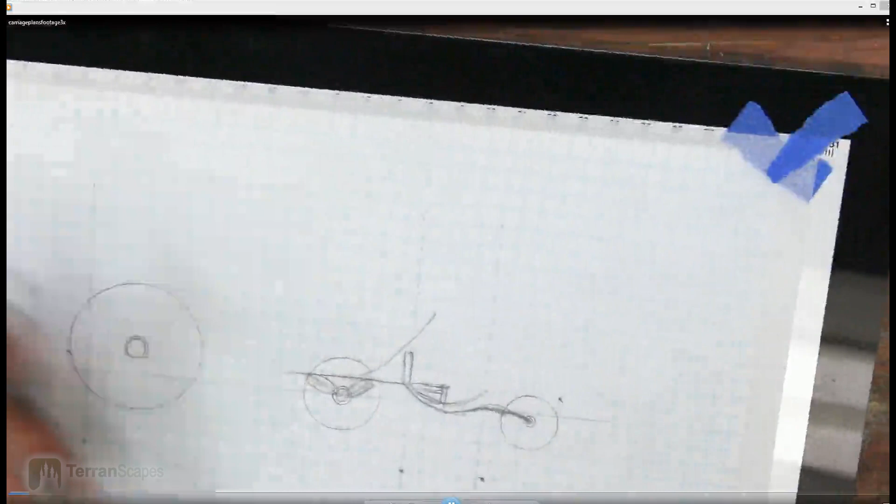I found it really helpful to do that. But at the same time, it did drive my designs to be somewhat similar to the ones that I had seen. So there's a compromise between fostering maximum creativity in terms of raw design and making sure you don't go too far astray while you're working on something. But overall I felt pretty good about the process I went through.

The first thing you're seeing here is that I'm working on some preliminary sketches. One of the things that's a challenge for me is to try to be quick with my early sketches, since I'm likely to make significant revisions along the way. Spending a lot of time getting the initial sketches looking really right ends up being quite a bit of a waste of time.

But one of my personal challenges is that I can't... oh, by the way, this footage is at 3x speed, so just so you know. We've got about three and a half hours of footage here compressed down to one. That allowed me — little tangent here — to show you more of the work at the bench, rather than just recording it with my dialogue, which I can't speed up while I'm actually working.

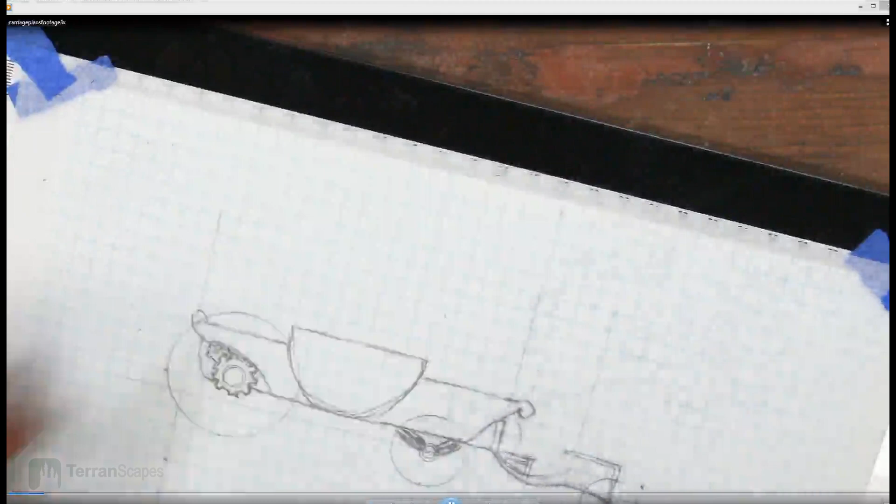So there's another benefit to this format. Where was I? I was talking about my process. For me, it's very hard to see things when they're messy. Chaos does not work for me in general. I have to have a very neat environment when I'm working. If it gets too busy or too crazy, I have to stop and clean things because it starts creating visual and mental distractions for me.

So it's a challenge trying to just do some rough blocking in, and this is pretty good rough blocking in for me. I felt like I stopped rough work maybe a little early, but I just couldn't help it.

One of the things when I was designing the carriage—I'm now calling this the tour carriage, because tour bus just doesn't quite seem right. So this is the tour carriage, and I want to have 3 rows of chairs, benches for passengers, which is probably a mistake because that encourages me to put more miniatures on it, which, yowzers, there's a lot of sculpting work that's going to have to be done there.

But it felt like I wanted to have a central component down below, something I saw on many of the examples, that little enclosed carriage spot in the center of the vehicle. One of the ideas I had early on was to have that wide open, to have it be another bench area underneath that isn't enclosed, and it just doesn't seem quite right. Plus it's going to be really dirty for the passengers, because they're close to the ground and the wheels. So I ended up going with the closed-in look, and I carried that through the rest of the design work.

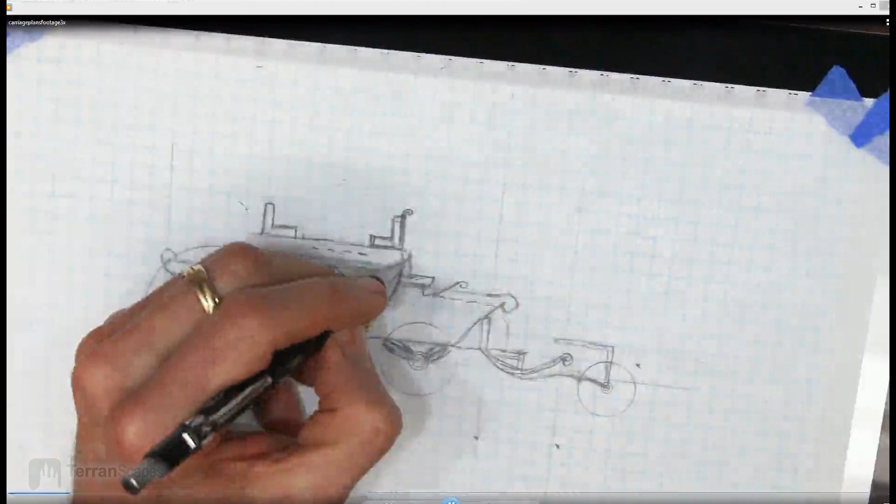You can see me trying to figure out what to do with the seats at this moment. I need to get some miniatures to actually get this down pat, because I discovered while working on this that after all my work measuring the miniatures—how far his knees and thighs, how long do his feet extend out—I kept looking at it and thinking something looks wrong. I put the miniature up against the paper and thought, this doesn't look right. I don't know where I went astray, but I believe the original seating plan I had was too small.

So that actually had the benefit, though, of allowing me to shorten the front of the carriage. The carriage didn't get longer, even though I ended up extending some things. It was interesting to see how the proportions of some areas changed, but not extending it beyond that original length, which I think was about 6.5 inches, my original idea.

So I really need to get some miniatures, sit down with them, break one at the knees and waist, and then make a seat for him. That's actually going to happen before I start real construction on the carriage.

I should have mentioned I said I was going to go right to the 3D mock-up from the last video, and I was thinking I'd just throw something together for the carriage. That made me think, well, I need some rough plans for it, maybe something a little more detailed than the original top-down sketch I had. And I felt like I needed a side view as well so I could do that mock-up.

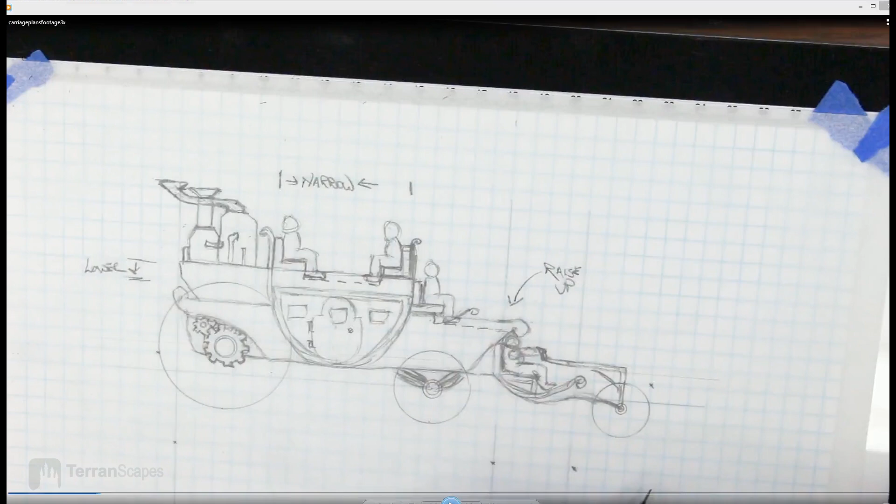Oh, there we go. So you can see here, once I finish, I throw in some notes around the sketch to help me think about areas to focus on for the next version. At this point, I'm pointing out structural changes, balance, and getting things more in proportion block-wise.

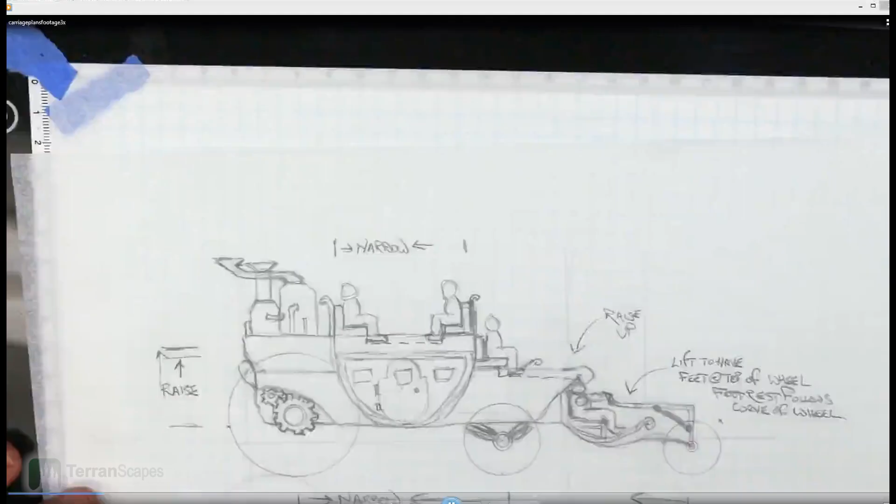One thing I should mention before we leave this is the middle wheel, the front big wheel of the carriage. I thought about putting in leaf springs, since there needs to be some kind of suspension system so it doesn't keep bouncing around when passengers are on it. The rear wheel is more challenging because it's connected to the drive chain, shaft, and gearing. I came up with a solution, which I'll show in the final drawing, but that required some extra thinking.

In one of the sketches I was looking at—sorry, this is off screen, I cut out a lot of footage of me not being centered, it was a little challenging along the way—but I wanted to leave this in so you could see the very beginning of it. We'll talk about the suspension maybe a little later.

Here you see me using what I believe is a French Curves template. I bought this a while ago with all my other drafting stuff and never really used it much. I think I'm using it a bit too early here, since it makes the draft more rigid rather than just throwing sketches on the paper.

But I found it helpful to create nice regular curves. Still, I found it challenging to make things symmetrical using it, because when I flip it over, I have to make sure I've lined it up pretty much the exact same way, and that can be tricky since the French curve template doesn't have any markings on it.

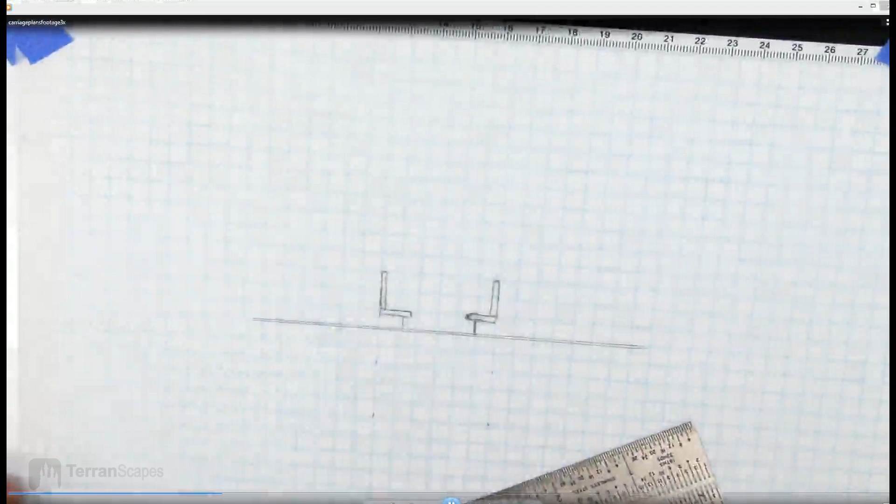You can see up in the corners, I just throw some blue tape on the corners of the paper and tape it down, so I can continuously throw tracing paper right over the graph paper, and it's nice and clean and easy to erase. When I take it off the graph paper, it visually comes through a lot cleaner as well. I really enjoyed this little setup, and I use it for all the sort of drafting and sketching work that I do.

Now I'm working on the 3rd version, and we're 20 minutes into this video, and I'll spend almost the remainder of the time on this version. It's a little bit early maybe to go to the final version, but I just felt like I had enough of a conception to stick with one idea from here on, although I make some moderate changes along the way.

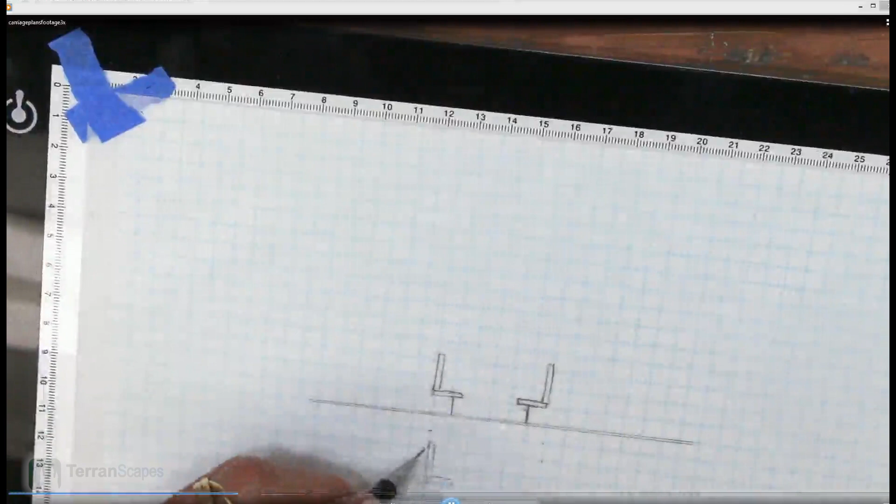It's how it works. I find design work like this very enjoyable, but at the same time, it feels a little pressing to get it done so that I can start building.

This is a new experience for me, in that I feel pressed to get to the construction for you guys. I think at some point you're probably going to be done watching me draw things and you'd like to see me actually build something. Whereas in the past, I've felt that way for my client, thinking I need to get past this stage to get building for them. So still, I'm in the same position, and I think even if I didn't have anybody looking over my shoulder, I would feel the same way.

Doing this drafting work here, I'm showing you 3 hours of work, but I probably spent, I don't know, that's probably a little high, but I spent a long time doing these drafts, and I feel like it's really important though. Imagine going through the process of building and then trying to make these kinds of revisions along the way - that's just insane. So it's important. I enjoy it, but it takes a while, and that can feel a little frustrating for me because I'm not very quick at it. So, pros and cons, challenges, rewards - part of the life of what it is that I do.

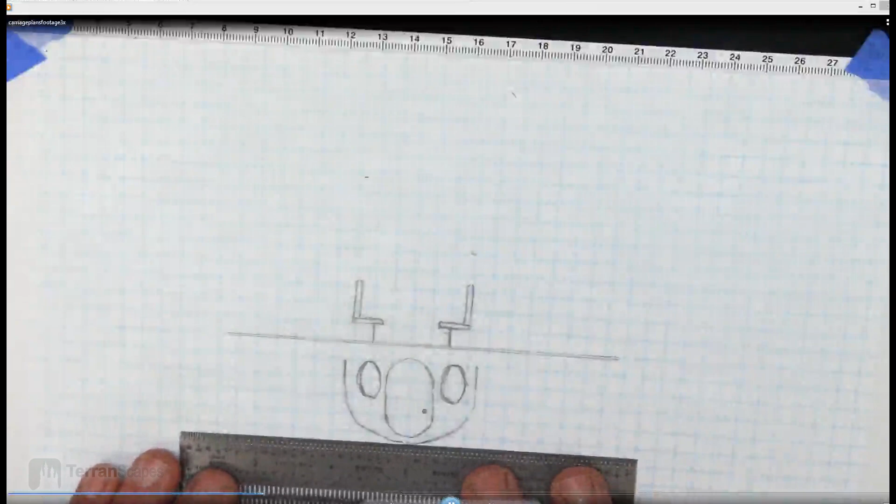What I started working towards, which you see here, and I changed quite a bit later on, is I was kind of going for a bit of a diving bell look. I was thinking, because I'm next to the harbor, that it might help me convey a sense of a connection to the water, and that really was a mistake.

Well, I don't want to call it a mistake - it was just not a direction that I ended up going in. So you see here where I'm trying to match up the sides, and I'm like, wait a minute, where was that? How does that match? Why is that not right? I couldn't quite get it - I get it, but it takes me a few instances.

That's what I was talking about with the French curves template, that it's not always easiest to get good symmetry. Another aspect of this part of the design is that I had originally intended the bottom of the carriage chamber to have more of a point at the bottom. But when I was looking at references, and thinking about it myself, having a flat bottom shortens it a little bit and allows more foot space for the passengers, so it just made more sense to have that flat bottom.

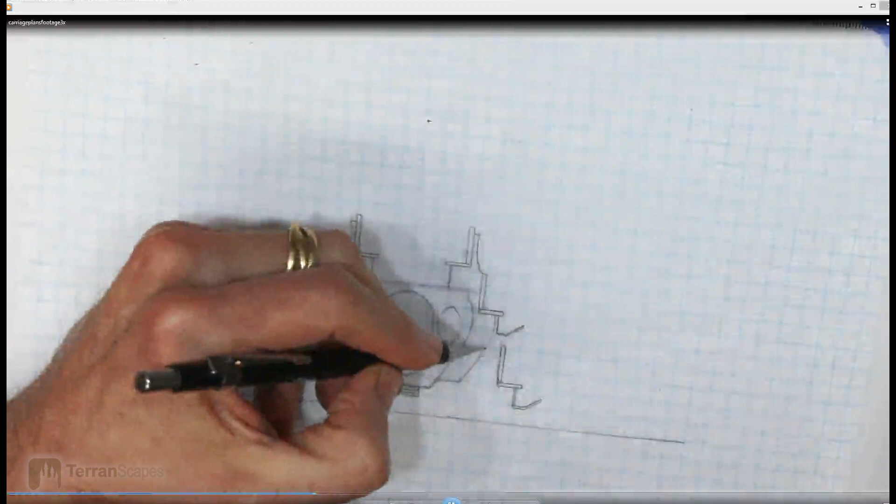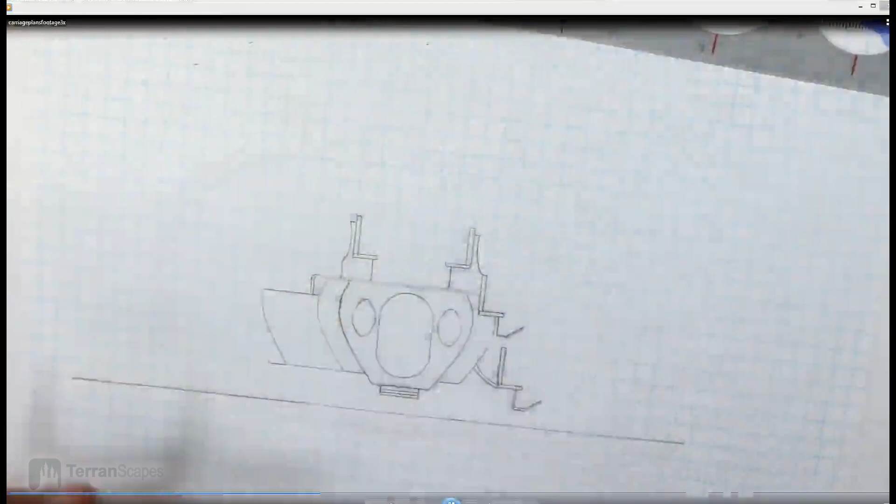So we've jumped ahead a little bit here. The front of the carriage where the driver sits, and that front wheel, became its own area of focus and challenge. Where I started with the driver, I liked a lot—I had him pretty low, so he's riding just above the ground, right in front of the main front wheel of the carriage, and it seemed like a great place for him. But you'll see later that I had to move him a bit to work with the seating right above him, which was planned for passengers.

One of the things I also had to consider is that the head of a passenger or the driver sits above the back of the chair, so I've got to leave some space above the chair to accommodate that and not make it feel cramped for the passengers or the driver. It's an interesting conundrum that I modify as I go along.

Now, when I'm placing the wheels, one of the major considerations I've been working through is where the axle is going to go. If I want big wheels—and I want pretty big wheels—I'm forced to push the wheels out away from the main body, otherwise they'd overlap the door to the carriage underneath. That meant I had to think about how they were going to attach, and the rear wheel is an extreme example of that because of its much larger size.

So what I decided to do—and I felt a little proud about this solution—is put the front wheel on a pivoting lever, so I can have a shock absorber above it that lets it flex up and down on that pivoting axle. That gives me a suspension system, and putting a shock absorber above it is going to be much easier than trying to model leaf springs. I haven't seen anything like that in any of my references, so I thought, that's kind of nice—something a little original that I think will work out really well.

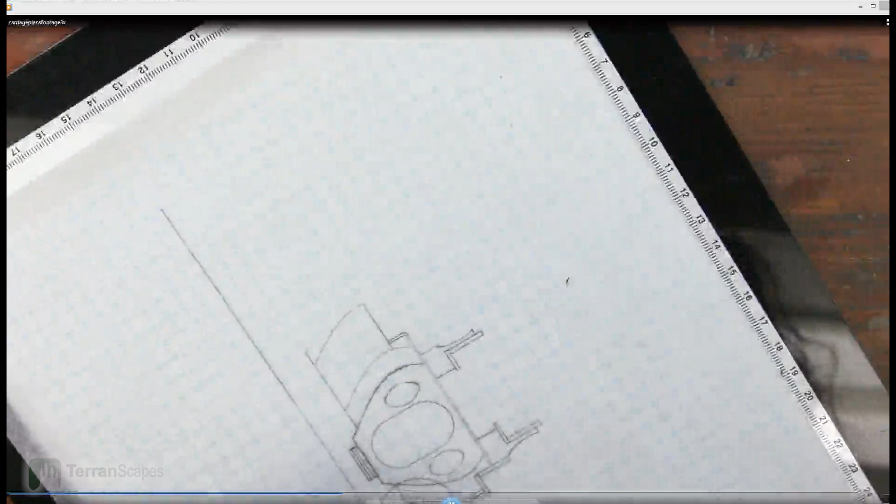There's the pivot joint, but that's probably going to have to change a little once I get the final model underway and get a better sense of how the axles are going to meet the body of the carriage. I plan on doing a new top-down view so I can incorporate these new design elements to make that more accurate.

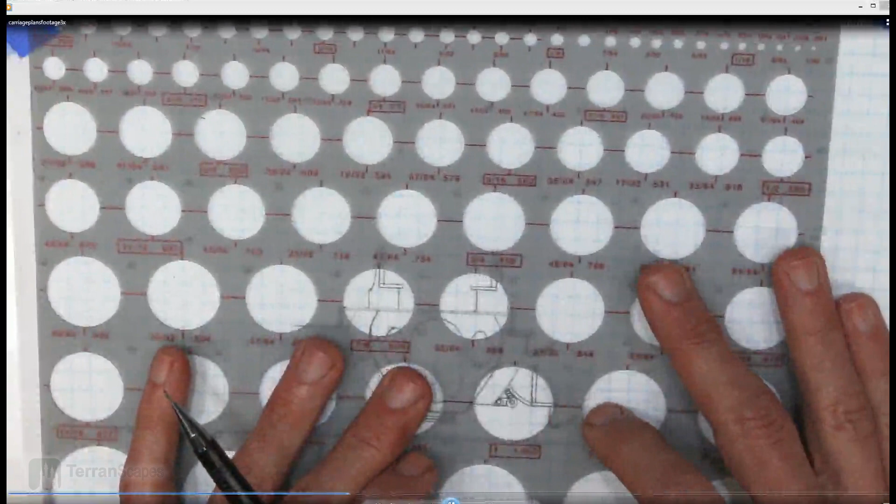But I'm not going to be doing a front or rear view since I can, for the most part, see those visually pretty easily. But I feel like I need the top-down view to get a sense of the width of the vehicle, and I'm going to make a very simple 3D mock-up of the carriage to plan out the scene. I really need that top-down view combined with the side view.

I wish I had taken some classes on drafting. I think that would have helped so much. You know, when I was in college, just take a drafting class, because one of my really big deficits is not being able to do a perspective drawing.

And I actually bought some perspective drawing books, and I was practicing for a while, and I spent quite a bit of time on it. I think based on that experience, if I took some time, I could get a perspective drawing done, but it would take me a while, too long, and I'm slow enough as it is. But boy, that would really make viewing anything that I draw so much easier.

There are bound to be people who are going to suggest, and have done so many times, that I should do this kind of design work in SketchUp or something like that, where on the computer I can rotate it in any direction. I've said this before, I'll say it again.

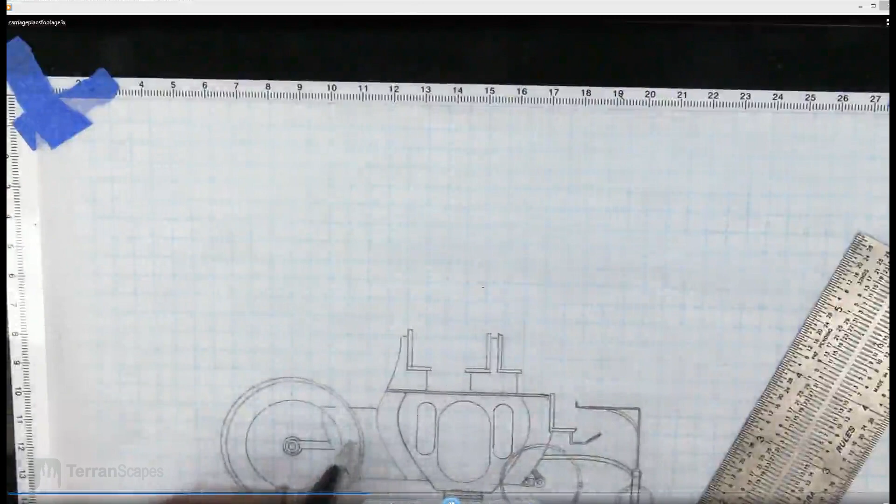Oh, this is my protractor, and I really hate working with it. I hate working with it. But I don't have another protractor, so I'm just getting by with it, and it's what I've got. I use it so infrequently I've been reluctant to purchase another one, although I could probably get a plastic protractor for $2 on Amazon. Maybe I should just go and buy one and put it in the drafting box.

Where was I? Computer drafting. I played around in SketchUp for probably about 4 or 5 hours, and I was learning, but it was very time consuming for me to get a handle on how to fluently rotate things and create shapes and attach them. Something like this, where there's a lot of curves, it would take me forever to draw in SketchUp until I got fluent in it.

And I have so much software I want to be fluent in that I just haven't been willing to devote the time to it. Quite frankly, I'm a little old-fashioned. I love paper and pencil. I love the erasing and sitting at the bench, and there's a real pleasure to that. If I was annoyed by drawing with paper and pencil, if I hated this process, I probably would have moved to the computer already, but because I enjoy it, that's where I'm at.

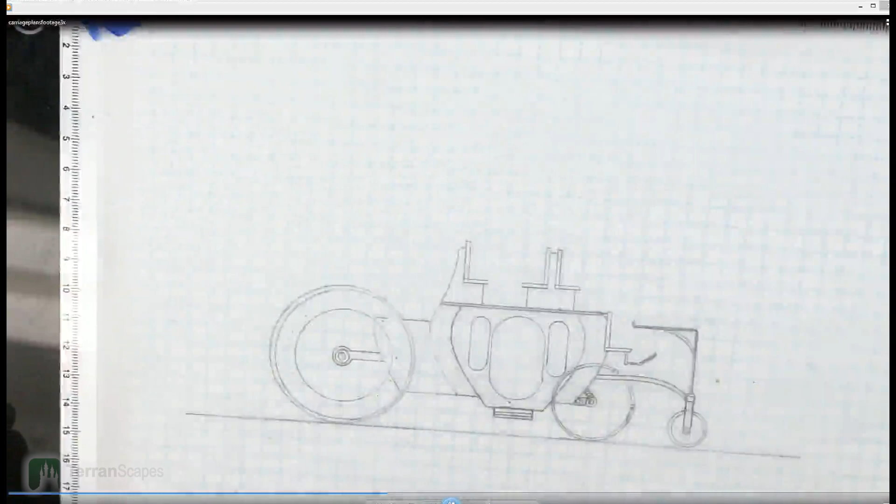In the long run I'm probably slowing myself down, because once I got fluent, that would be a bonus to be doing it on the computer. But I don't think it's ever going to happen. I would love to be fluent in a couple different programs that I haven't even studied.

We have to choose where we're going to expend our time. I guarantee you, if you're watching the video and you've listened this far, look in the comments—somebody hasn't listened to this part, and they're going to tell me, why didn't you do it in Google SketchUp?

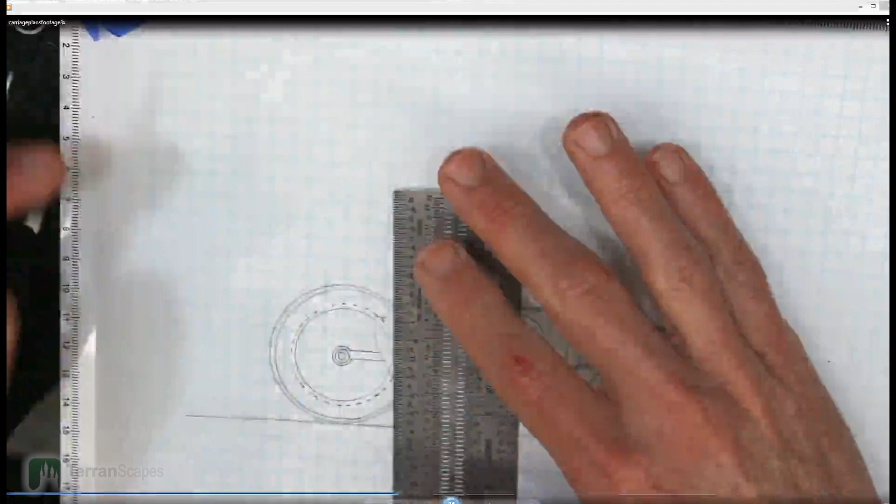Back to the drafting work I'm doing here. I'm working on the rear wheel, and at this moment I'm trying to envision the spokes and the gears. This is actually the gear for the rear wheel, which I'm envisioning being quite large.

Here you see me, I'm like, okay, I'm going to use the ruler for this. And then you'll see me, okay, screw the ruler, I'm just going to draw them in. There are limits to my neuroticism.

But you'll notice the axle of the wheel—it occurred to me that I can do something similar to the front wheel and extend it backwards. I'm going to show you some watch hands at the end of the video. I won't explain it any more than that, but I can use them perhaps to make the axle holder, and I think that gives me a lot of flexibility in how I want to work with the rear wheel. I need some of that space to accommodate the gearing, because if I have a large gear in the back wheel, I need space in front of it for the smaller gears that drive it.

So you can see, when I start putting in those gears here, I start to quickly fill up that space. And if I want to have other elements there, like little metal plates or a pipe, that little section of canvas starts to fill up pretty quick. But I'm having some difficulty.

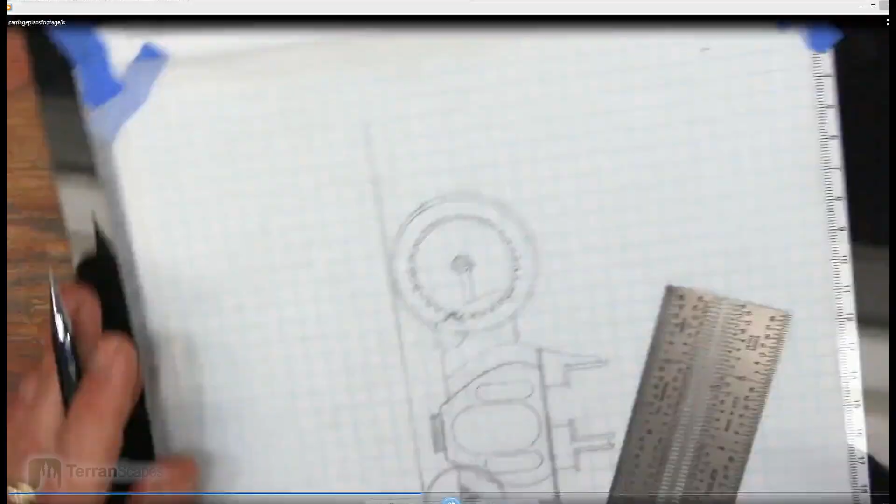One of the things I realized a little bit later on when working on this, I think by the end of the second draft, is that I want this vehicle to feel airy. When I look at some steampunk, it varies quite a bit. The genre has some definite themes that run through it in terms of visual design, but there can be quite a bit of variety as well. I wanted this to feel lightweight.

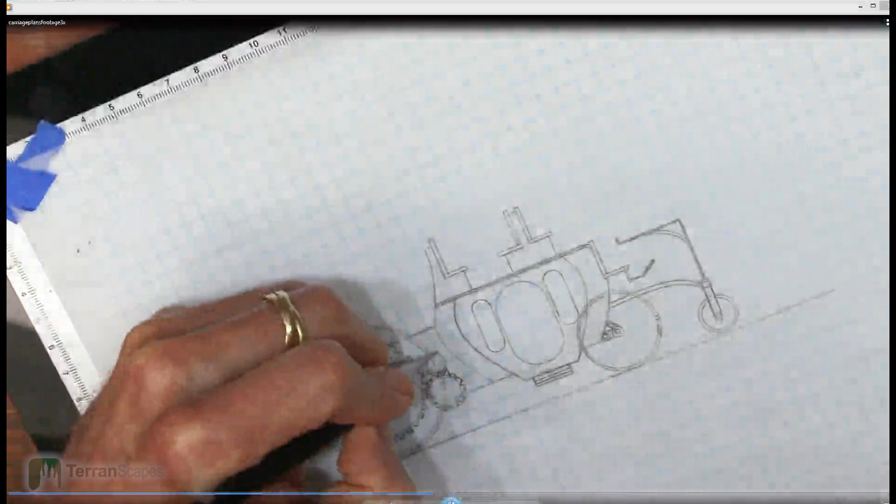A lot of times in steampunk universes, the underlying story background is that they have discovered some kind of super metal or super power source that allows them to design things that normally would exceed our normal physics. So one of the focuses was thinking about how to make it feel airy.

And if you look at the rear wheel, the sprocket that I put in is a fairly heavy, bulky sprocket, and that is not what I want. But I ended up just putting that one in as a placeholder because I'll end up trying to find a gear for it later that feels a little bit emptier, that has more negative space in it. So when I've been looking at other elements of the vehicle, that's something I've been keeping in mind and trying to envision.

Of course, the area in the back with the machinery, that's obviously going to be heavy feeling and should, but these are just some... oh, for God's sakes, skip that.

Working with the back of the vehicle and the power plant, it's amazing how each section of the vehicle has its own challenges and design, very different design feels, very different design elements. So, in the back, it's how do I give it a busy feel, I guess is the word I'm looking for.

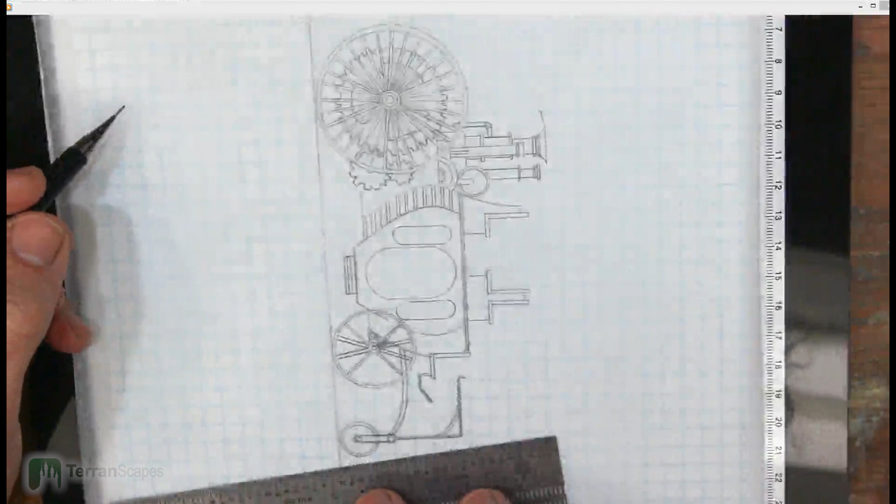So I was pretty excited about that solution, and I don't know if I'll really be able to show it in the top-down view, but that is something you will see in the final vehicle. I think it just provides the best solution to that problem.

But it was just really interesting looking at the different references and how that's never shown. It's kind of like when you're looking at motorcycle videos and photos, you always see the side with the tailpipes, but what's the other side look like? So sort of similar to that.

And here you can see me cleaning up those in-between areas with the very point of that eraser. That's one of the things that, like I said before, I really like about that eraser.

Even things like the spoke work on the wheels has its own sort of interesting design element, in that how many am I going to put in? The back wheel has too many, and you'll see me mark that later on. That's way too many. But that brings me to the topic of, how the hell am I going to build this?

Yeah, I have no idea how I am going to construct some of these elements.

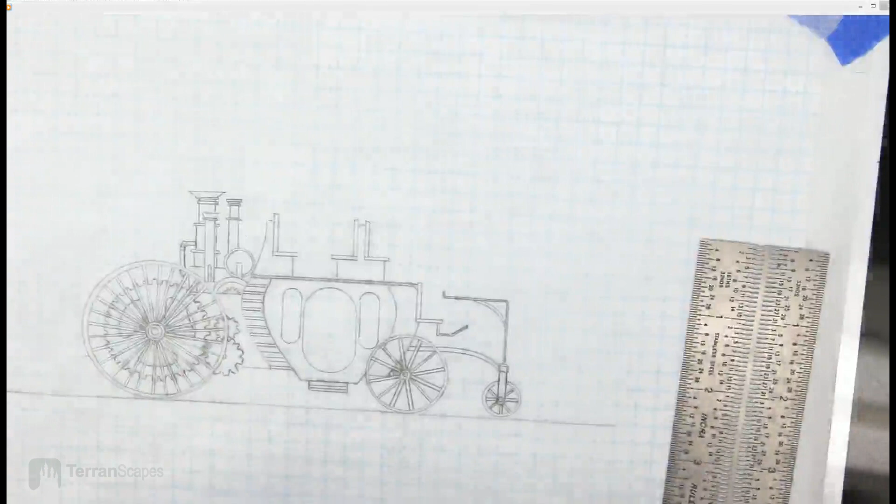Building the wheels is an interesting challenge, because if the spokes aren't perfectly matched or extremely close, and I make the wheel rim out of, say, a strip of styrene, when I put the spokes in they'll deform the wheel—either they'll push out a section or they won't meet the rim and cause problems. So I think I have a tool that will allow me to cut those pretty precisely.

But then I have to glue them in, and they have to be within the middle of the rim, right? So I'm going to have to make a jig to create some of these pieces, to space things properly and get their heights and such lined up right.

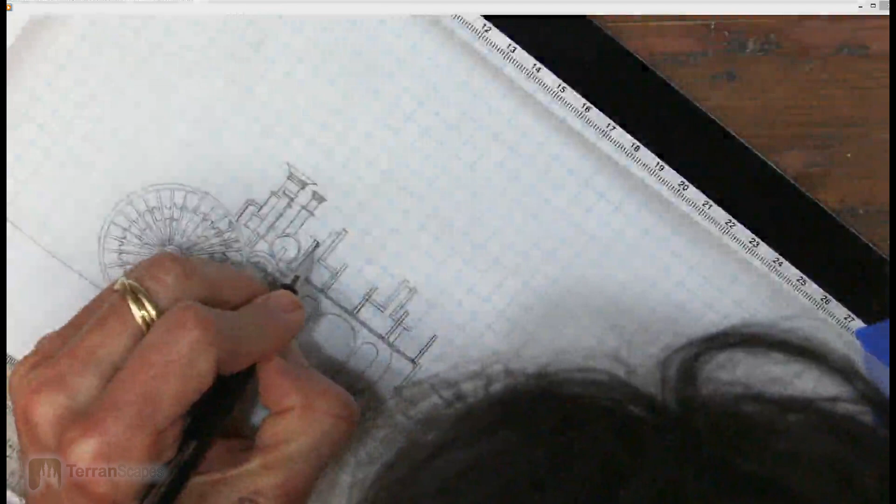I came up with the idea for cutting some of these pieces out by scanning this drawing, then I can make copies of it, and glue them down with a very light amount of spray adhesive that'll just peel off after I'm done. Then I can run styrene sheets through my scroll saw, using this as a template for directly cutting out the pieces that I want.

Cutting this kind of curving design with an X-Acto blade or whatever is a nightmare—that's never going to happen, it's never going to look good. So the scroll saw was like a big idea for me that I was really excited about.

And here I'm doing a little bit of a railing around the top, and I've seen some examples of that as well. That's been another, like, oh God, how am I going to do that? What I've drawn in here is much more basic than what I envision—this is definitely a placeholder—and how to create those fine posts and maybe add a little bit of a design.

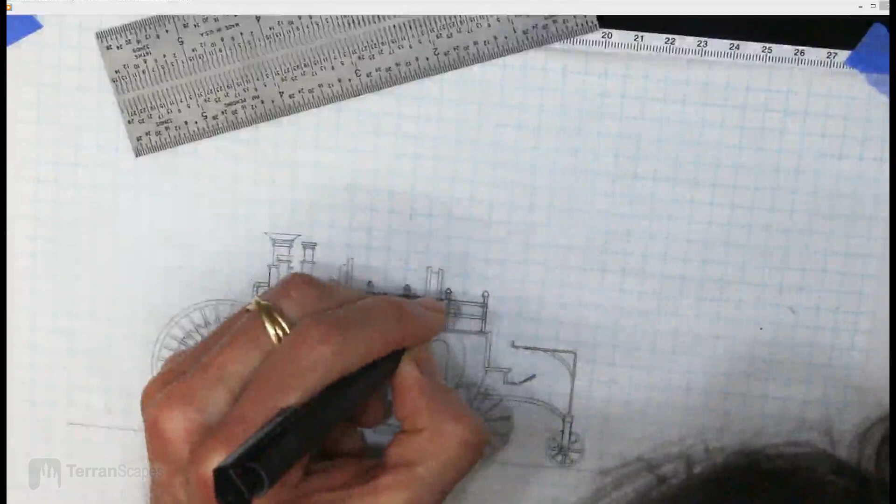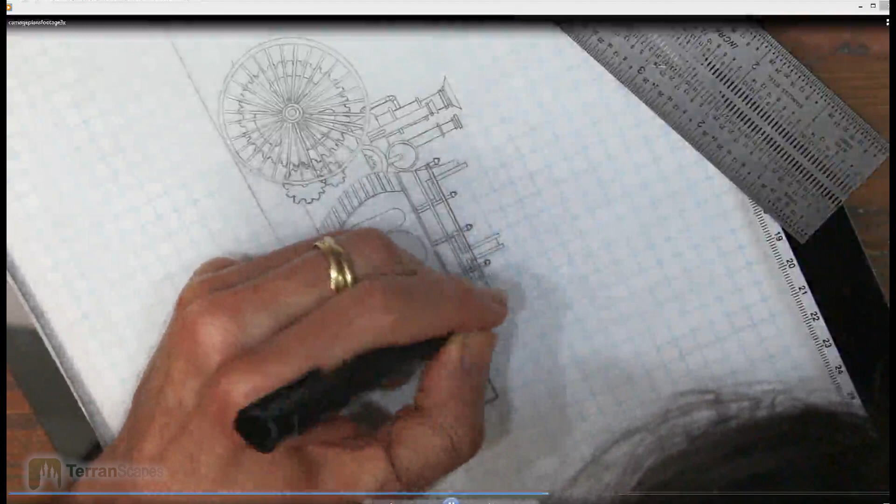After my attempt at doing design work on the elf buildings to have them laser cut, it left a little bit of a bad taste in my mouth. I won't go into it more than that, but I've decided that I would not pursue anything like that for this project, and that everything would be hand constructed.

That leads me to some problems where I have to figure out how I'm going to actually put things together. But it also allows me to create some elements that wouldn't easily be done with a laser cutter. And for things that are round, I have to do that with round styrene tube or something like that.

To build a little suspense, I came up with, I think, an excellent solution for the railing.

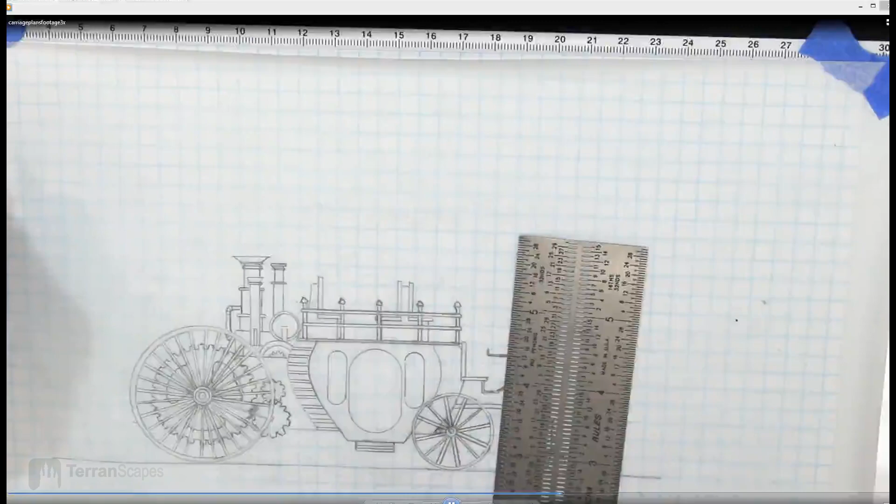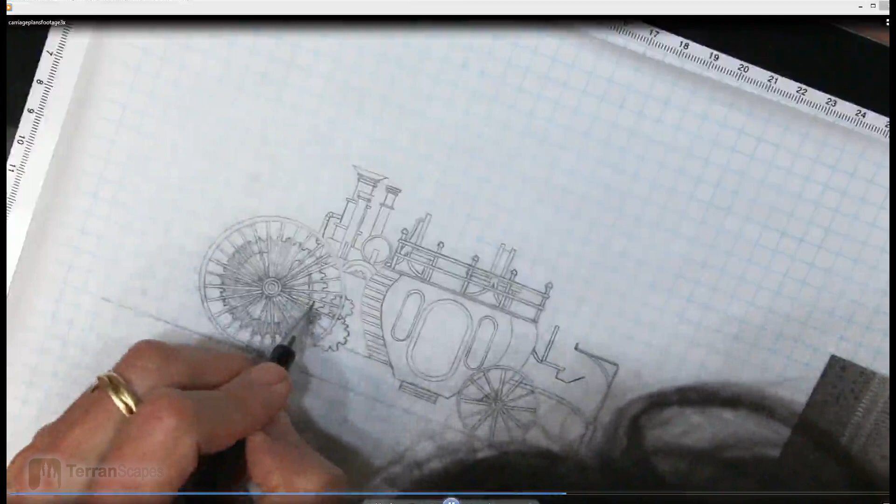One of the things that's interesting about the way I work - I don't know if this works for anybody else - is because each of my steps takes so long, it gives me a chance to think about things longer. As I'm going along, I do four hours, go away, come back the next day, and all of a sudden I've gotten an idea. If I had whipped out all of these drafts in one day and started construction, I would be pretty lost about how to do some things, and probably would start one way and then change my mind and have to take them apart later. So there's an advantage, I guess, to going slow and taking your time, at least for me.

So like I said, it's a bit of a mixed bag, my pacing on projects and different aspects of them, but it is one of the advantages that I'm always grateful for, pleased with. I don't know how to explain it exactly.

Here I start shading in some elements, to help me visually discriminate between them and give maybe a little bit of a sense of depth between the layers. Those gears, again, are very blocky. I'll be using much lighter, more delicate-looking gears in the final version.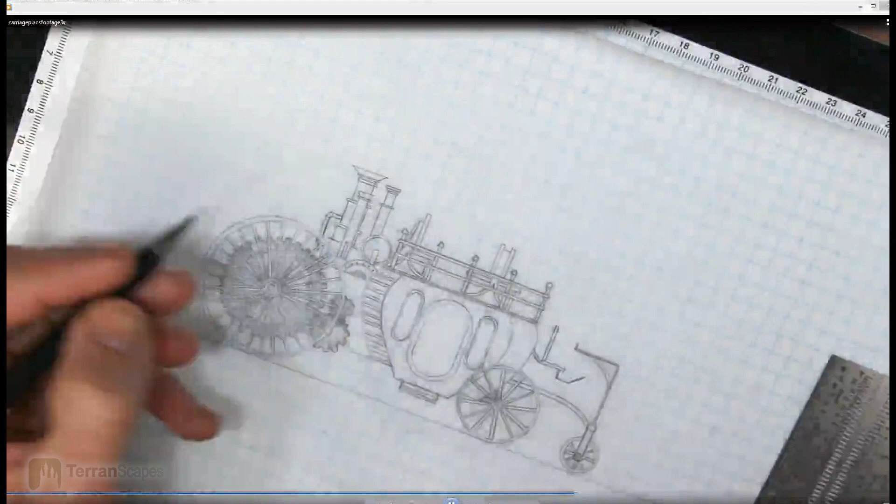Another element I was pondering as I worked on this were rivets. Rivets, rivets, rivets - how many should I have? A lot? Hardly any? Should I just have them on the steamwork behind and none on the front? I don't know, I'm still not 100% sure how far I'll go with that.

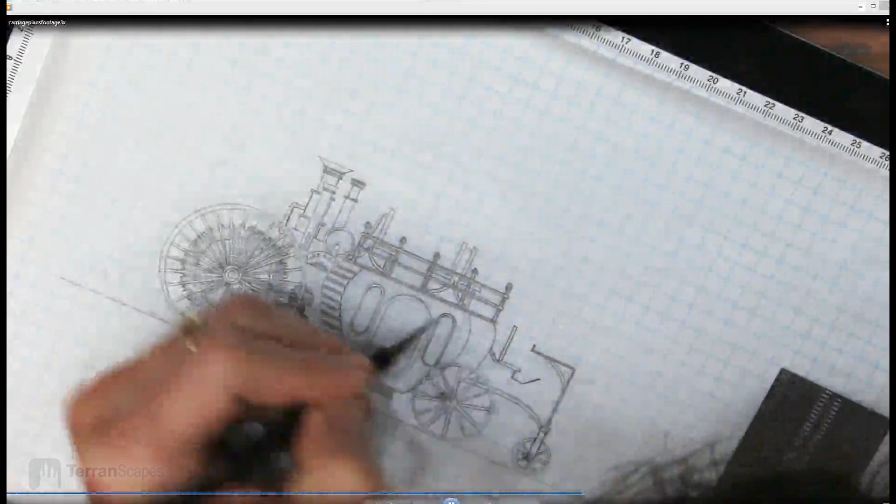A little bit later you'll see me maybe put some rivets around the door to get a sense of what that might look like. Here I'm still with that sort of diving bell look, and I'm going to change this in a bit. When I put the rivets around the door, I didn't like it - I don't want the carriage to feel heavy overall, and rivets certainly imply a weight to that.

Of course, I have a lot of rivet-making material that I've hardly ever used, so the excuse to use them on a project like this is tempting. I will be putting in a handful - too many, probably - rivets in the steamwork section of the vehicle, certainly.

But how to tie that into certain areas, I don't know. I think I'm going to keep them relegated to the back of the vehicle and have the front be basically wood construction in essence. I'm not going to be putting in planking for the construction of the carriage body - it's not like that kind of wood, but a wood feel rather than a metal plating feel is definitely where I'm going.

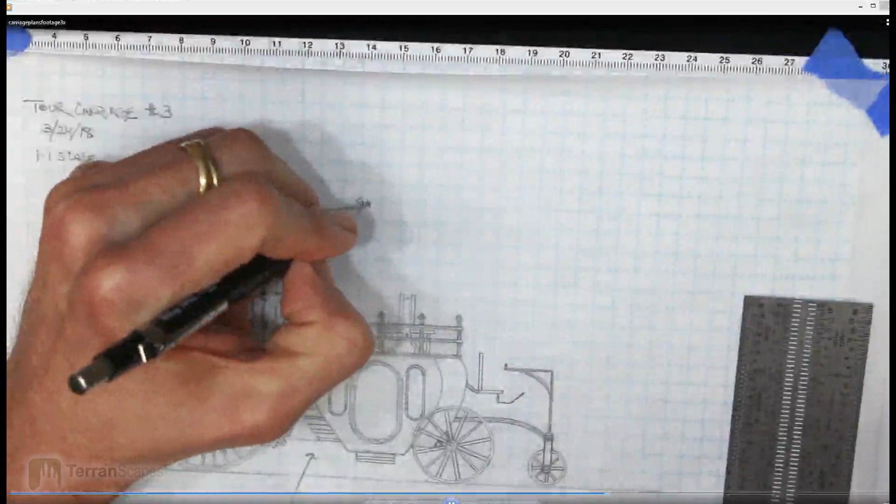Here you see me putting in some of those notes that I add to all of my drafts. Even though these are things I'm thinking about, sometimes for multiple days on end or even longer, I still write them down in case I come away from this draft for a while, so when I come back to it, it jogs my memory. It also gives me another way of thinking and problem solving, because sometimes as I'm writing down my thoughts on paper, it jogs me to think about a solution. So throwing in notes on the draft is always something kind of important to me.

So I'm trying to think about where the door handle should go. To me, the door handle should be reachable by the driver, since he needs to let people out, but it can't be at the very bottom in case the passengers want to use it themselves. That's why I used the miniature a couple minutes back, to throw it up against the door and see where exactly this is going to go.

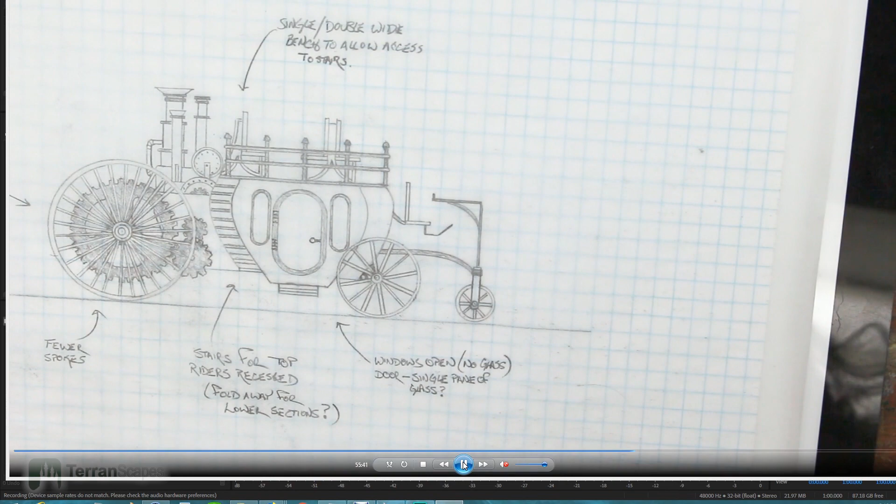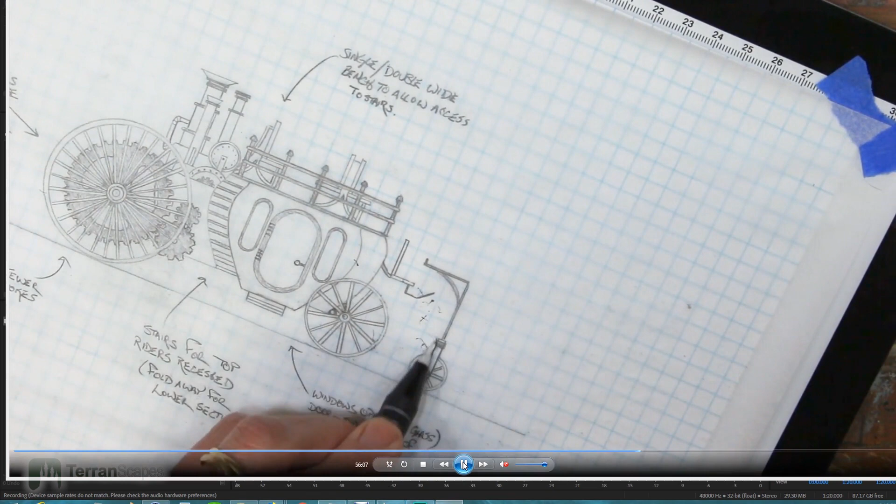So after pausing for a second, I realized that the recording quality was crappy. So I've made some changes, and I may need to change my software as well, but I think this setting will produce a better result. Not happy about that, but we'll work on that. I'm not going to re-record the first part because it was an hour of me chatting, and I try to keep it feeling kind of fresh and natural. So let us continue.

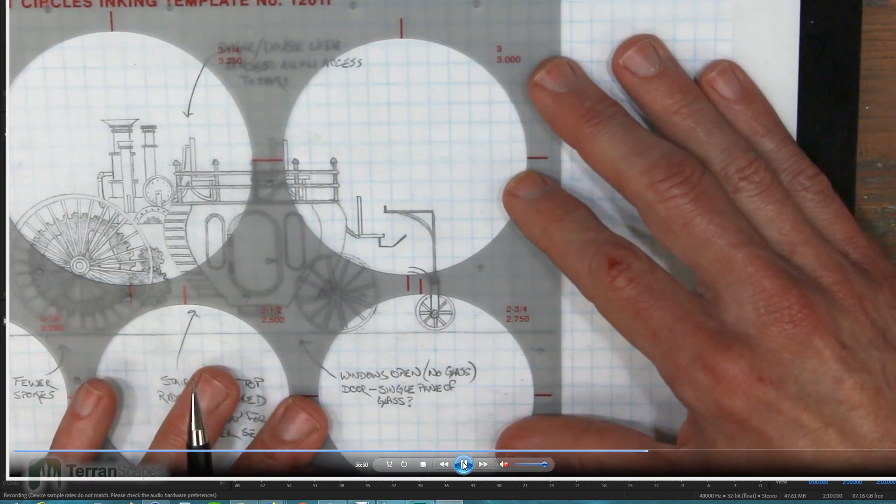If you noticed, I just made some notes about the windows of the carriage being glass or not glass. I had originally thought when I made that drawing that I might make the door a single pane of glass, thinking if this is a touring vehicle, you could see more if there was more of it that was open. I eventually changed the windows and door design, and I decided to keep them open. Most of the time, maybe all the time, I'm seeing all my examples being open windowed, and it simplifies things for me a little bit.

Here I wanted to have, you can see me trying to figure it out, a sweeping arc to the rod that's holding the front wheel or wheels. I haven't decided if it's a double wheel just yet. Despite my best efforts looking at the templates, my circles, I just could not figure out a curve that would work, so I hand drew this one in. It actually came out okay, but to get a nice smooth line, it required a lot of trying to clean it up. It annoyed me a little bit, but in the end I get a sense of what I was originally intending, at least. And again, I don't know how I'm going to make this.

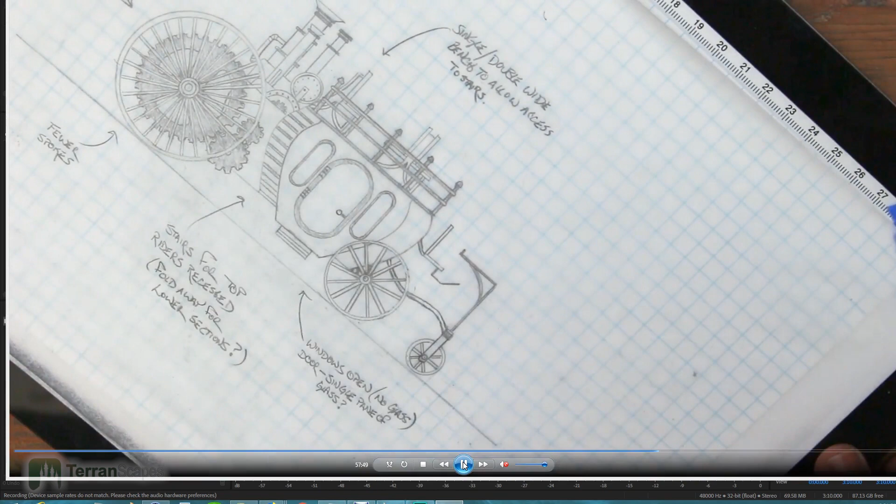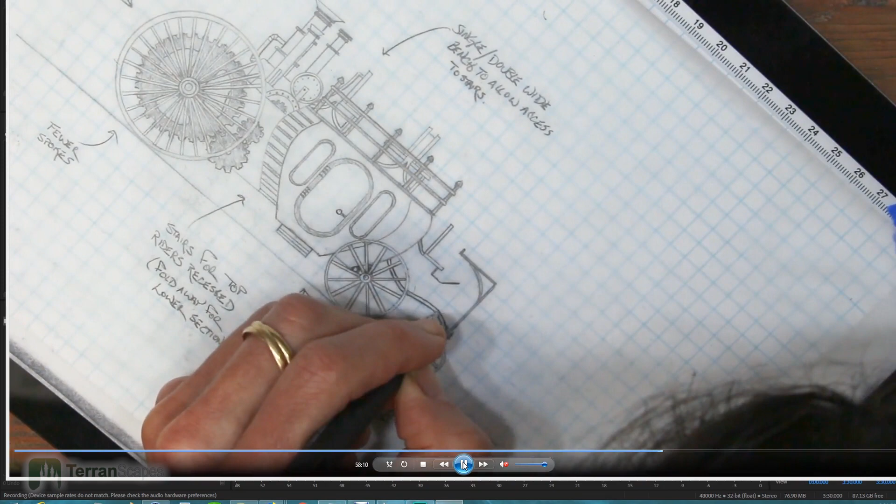Maybe I can heat styrene rod until it's soft enough that I can bend it, or I could do that with flat pieces. Anyway, I don't know, we'll see when I get there, but these are the kinds of things that I'm thinking about as I'm working on it. And I've decided that I was going to design it irrespective of how to construct it. I wanted to let my design not be impeded by the construction. Of course, along the way I've been a little worried at certain parts, but I can usually problem solve things somehow or another. I'll figure it out, and whatever I have to learn will only add to my skills, my toolbox, if you will.

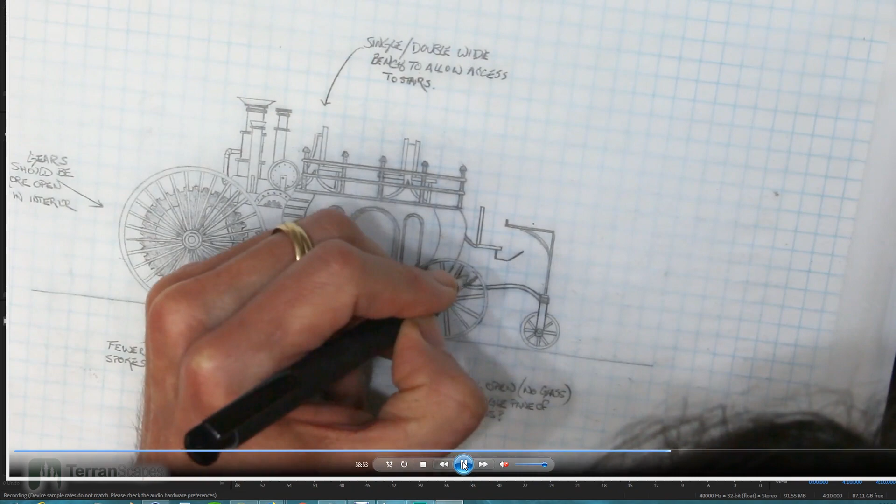And you can see here why I really hone that tip of my eraser down, so I can get in between those tiny lines. And it works out pretty well.

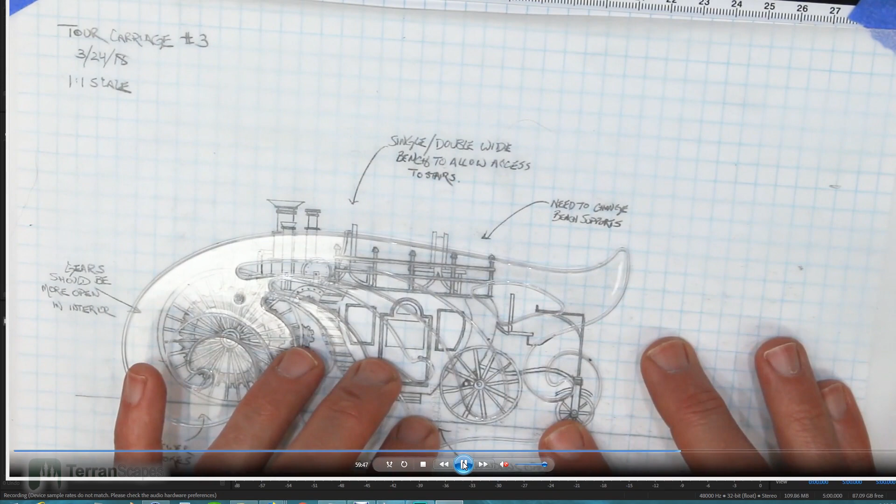So I turned the cameras back on here, and you can see I have changed the door and the windows. One of the things that I felt was that I had lost the Victorian look. And while it's steampunk and it's set in, whatever, a Lovecraftian world, I realized that the sort of diving bell look that I had was not right, not thematically right.

You can see I have a note that says I need to change the bench supports and the undersides of the benches that's holding them up. I need to change that as well, but that's not really important right now. And because the railing is in the way and everything, I decided I wasn't going to go back and try to revise that at this point, that I would do that a little bit later.

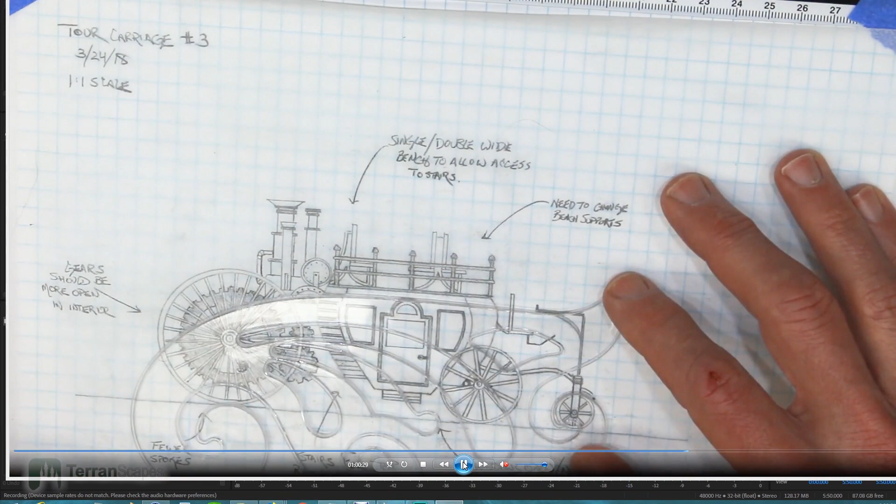And here you see me trying to put on the fenders for the front two wheels. I hadn't thought about that until towards the end. I was like, oh God, right, I need some mud splashers, basically.

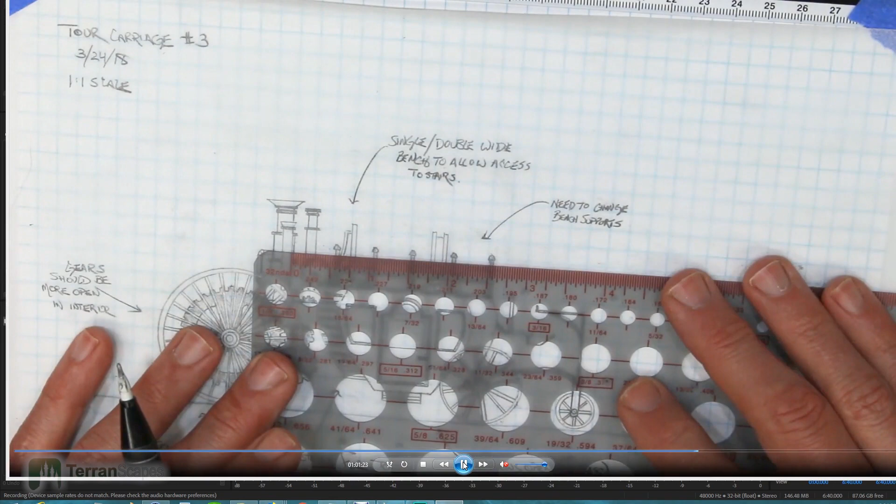I wanted to have this front fender have a little bit of a nice curve to it, like a flare at the back, and I just couldn't figure out how to do that with my templates. I decided in the end that I wouldn't worry about it. You'll see I eventually just put in a, see how close that is though to a little flare? It's like I need a tighter corner than what is possible on the French curves template. So in the end I decided I'll just put in a round one for now, and I'll figure it out later.

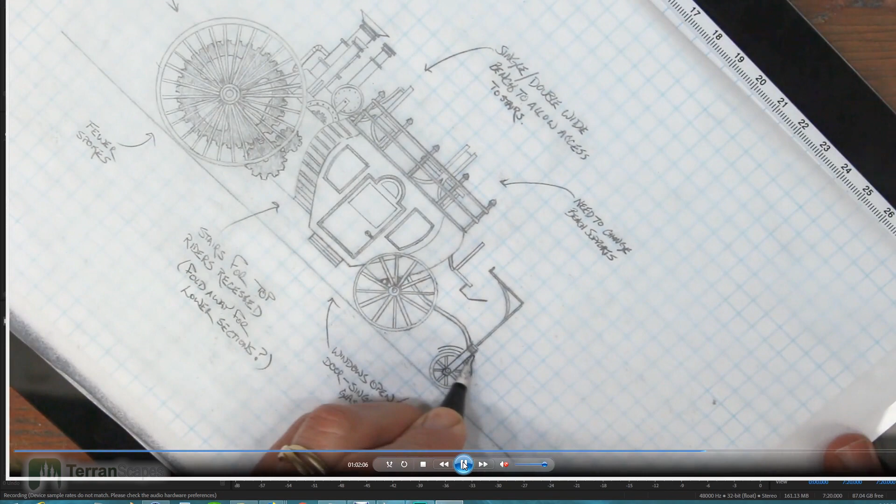This is actually the first time that I've done so much work with templates on a drawing. That was kind of interesting on its own, as I really like the crispness of the effect that it produces. But I did spend quite a bit of time trying to line up things and make them consistent. For instance, doing this fender work, I have to choose two different diameters of circles to be able to create parallel lines, and so then it's like figuring that out, and which one. It's part of why the process was a little slow, I guess that's probably the best way to describe it.

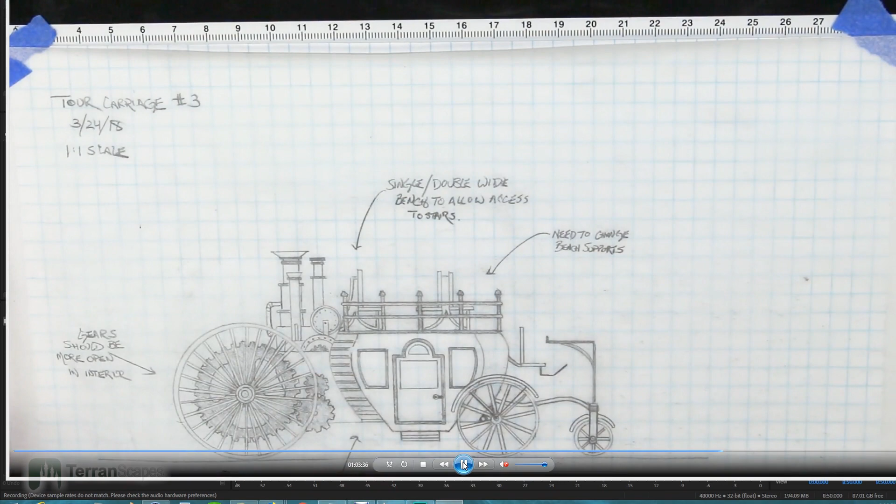One thing I realized almost at this exact point during the process is that it would have been nice to draw from front to back, so I could draw around things that were blocking. I kind of knew this when working on the machinery section in the back, where I drew front pieces and then stuff behind it so I didn't have to erase as much. But I don't think I could have done that with the carriage, since I didn't know where to put the wheels until the carriage was in, or where to put the railing until the benches were in. On the rear wheel, I could have put in the gear first and then the spokes, or vice versa, but whatever. It was an interesting thought as I went through it - the order of operations can save you time.

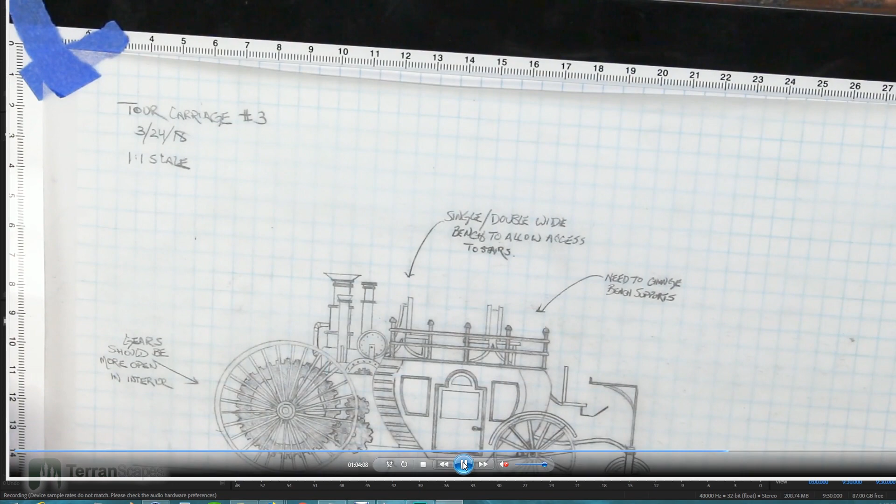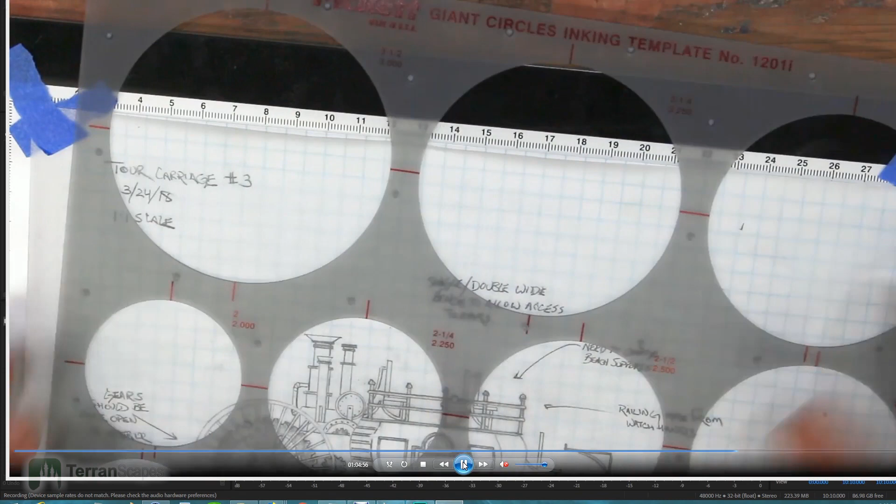Oh, there's something else I didn't mention. When I erase and want to get the eraser bits off the page, I use a soft paintbrush to brush them off, which helps reduce smudging of the pencil. What's unfortunate is because I'm left-handed - though a right-handed person would probably have the same problem - I tend to smudge it with my pinky resting on the paper. So I try hard not to touch the paper as I'm working, keeping my hand off to the side if possible. But even with that care, the ruler dragging across the paper picks up some pencil lead and smudges it.

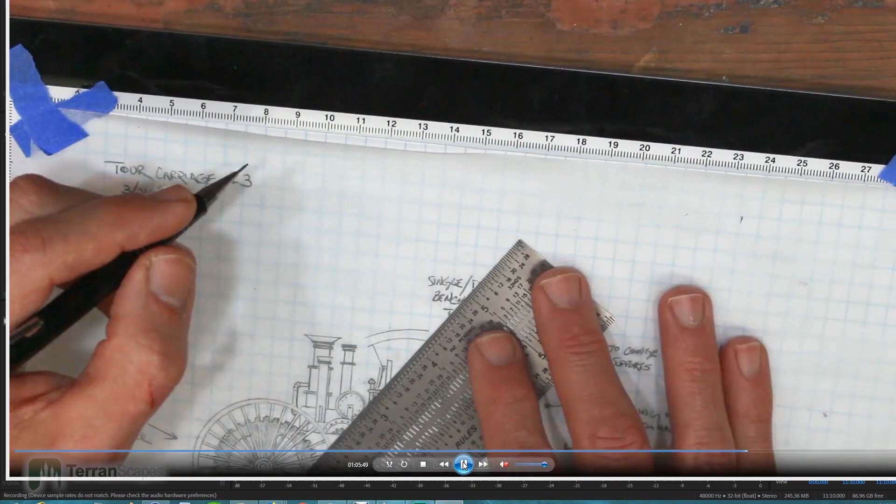So when I'm done with my draft, I give it a clear coat. There are professional sketching sprays you can use to preserve sketches from that sort of abrasion damage, rubbing off, smearing. I just use a can of matte clear coat - spray it, and when it dries it gives a nice protective layer. It actually darkens the pencil too. I'll do that at some point here before the very end, and you'll see that color change. I never thought about it before. You could do it partway through, but no, you don't want to cover the paper and then try to draw on top of that.

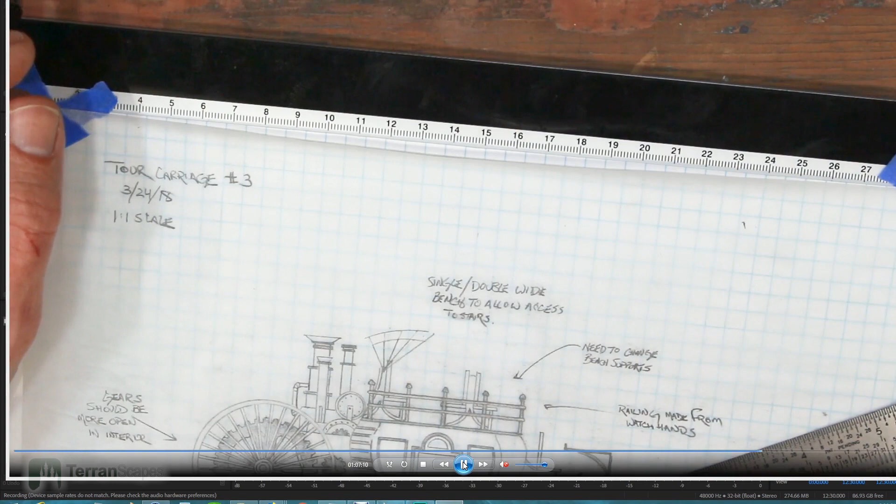So anyway, that's a little thinking on the spot. I decided I do like the idea of a canopy, and here I decided maybe I'd put one over the rear bench only. I had a note on this a ways back, that if I put a canopy all the way across, it would block your view of the miniature sitting on the benches, and I don't want that after spending all that time on them. But a partial canopy over the rear bench doesn't create that effect, and I think it finishes the top of the carriage nicely. Just having the benches exposed with nothing up there makes it feel unfinished - maybe because I'm so used to seeing roofs on vehicles. We rarely see an open-topped vehicle unless it's a farm wagon or something. So I decided to put one in. It took a little while to figure out how to draw it and make it look sensible, but I got pretty okay at it by the end.

I've been looking around for miniatures. If you're a patron, you'll have seen one of my recent posts where I listed all the companies I found that have steampunk miniatures - I scoured the web for them. One of the sites I found has carriages, not necessarily steampunkish, though some are. One of them has a canopy on it and a few other interesting bits that might be useful.

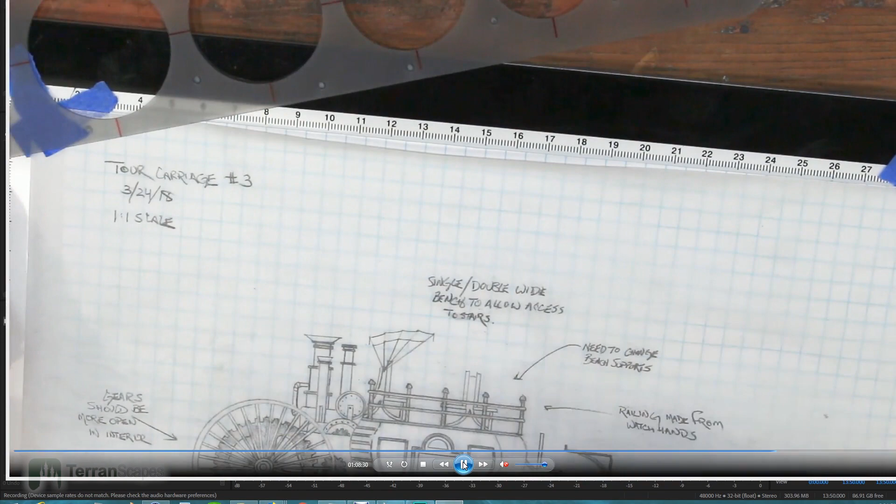So right now I'm contemplating purchasing a couple pieces from this site and using them, sort of... oh my gosh, what do you call it when you cut apart kits and put them together into your own thing? It's not scratch build - it's... you're just shouting at me right now. It'll come to me in a minute.

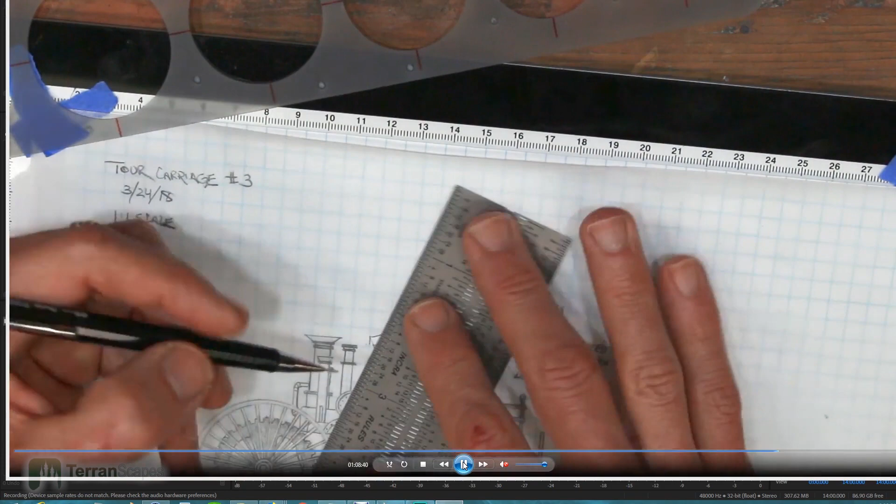Kit bash, that's what it is. So I might kit bash some of them. The only problem is the carriages that are sold come with a pair of horses as well. And the carriages are a little... I mean, they're not expensive for what you're getting, actually. I think it's pretty reasonable. But they're in the $20 range or so, maybe 25, even maybe 30. And that adds up if I want more than one.

So right now I'm expecting this to cost probably at least $50 in miniatures. Definitely for the whole project more, but I think for the carriage, if I've got - what have I got - maybe 8 miniatures, maybe more, 10, right?

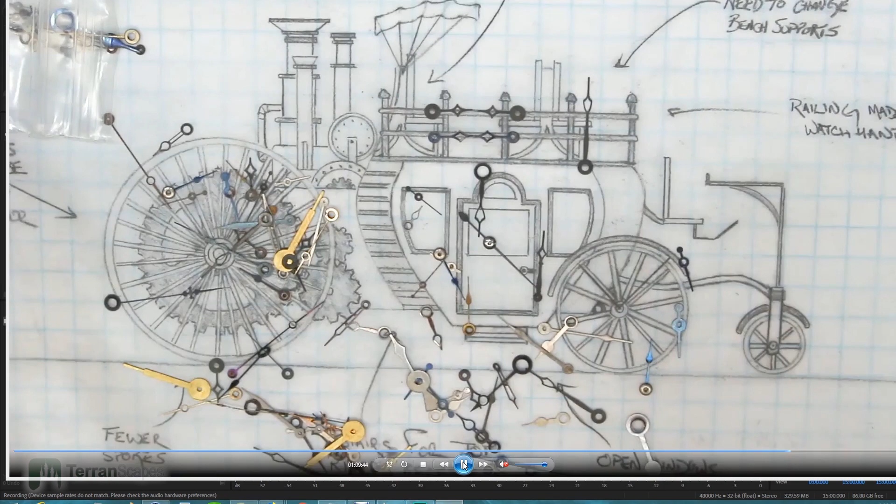And actually that leads me to thinking about passengers in the actual internal carriage area, and that adds its own challenge. So moving to something fresh.

So I had purchased these watch hands, and I got some gears. This was for a project a while back, and I picked these up on Etsy. And it occurred to me when I was looking at them that they might work really well for the railing.

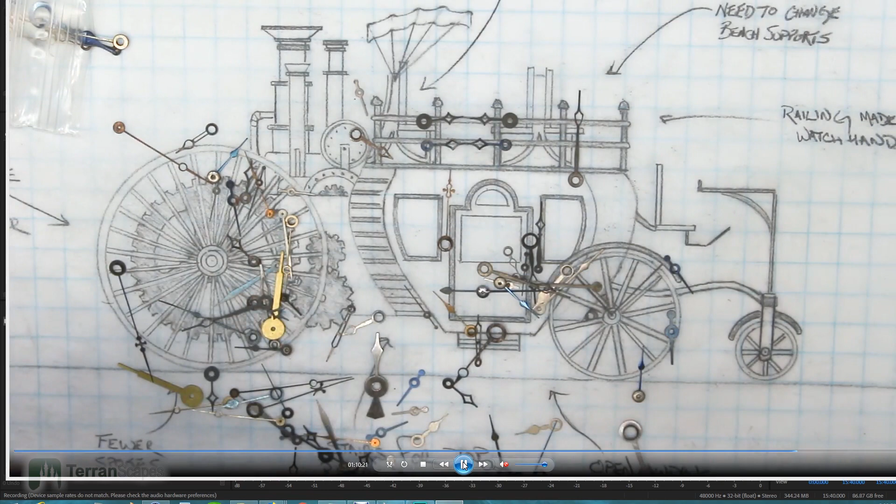Now, the set I bought has some duplicates in it, but it doesn't have enough duplicates. But it would be easy to get another larger bundle, and in fact it seems like people who are selling these get them from similar sources. So I expect I would get multiple dupes later on, and all I need is - what is that, 5, 10? I need 12 uprights for the posts of the railing, and I have some flexibility in how I choose. I could mix parts for the actual cross beams.

These are some of the gears that I have, and these are great. I love them, and they work really well for certain areas of the structure. You can see me kind of getting some ideas, but this set of gears in particular doesn't have any thick gears - these are all very thin.

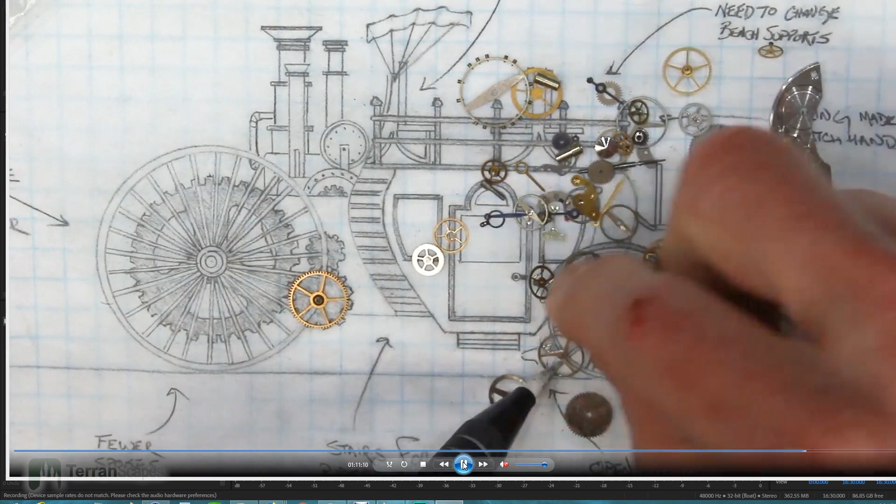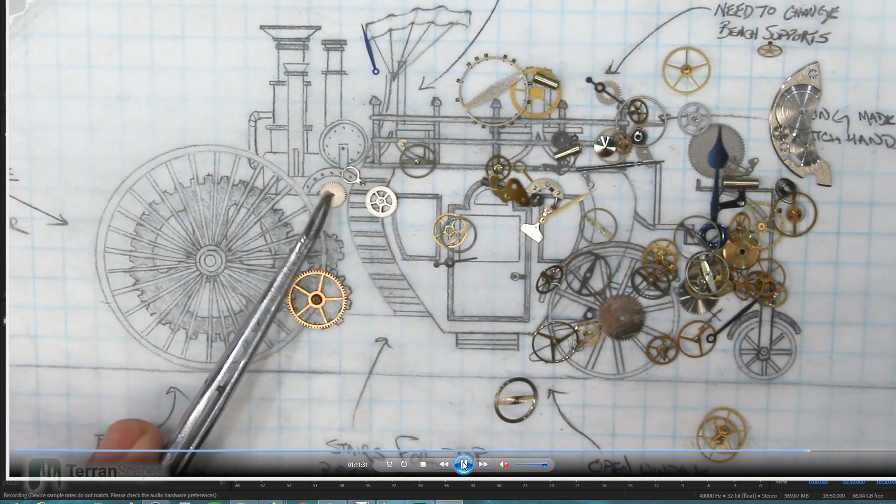These are watch part gears, and they won't work, say, for the large cog for the wheel, because trying to make sure that these very, very thin pieces all line up properly is a nightmare. I don't even want to try doing that when they're meeting edge on. So I'm going to have to get some that are a little bit thicker.

And I actually took a look around, and I found some great bundles. I haven't ordered them yet, but I found some that will work really well. And some of these will need some modification, cutting off some of the posts.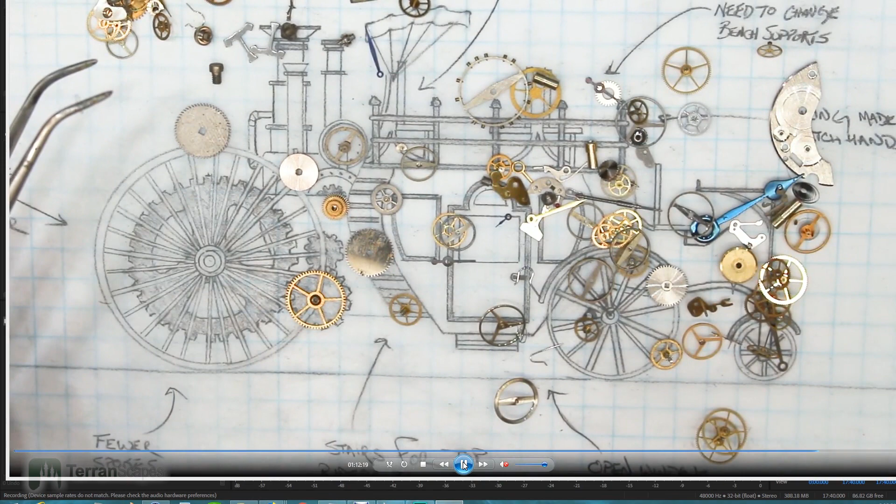And one thing I discovered is that I need to get some non-magnetic tweezers, because many of these small parts stick to my tweezers, and that doesn't make it easier to work with these things. I have one pair of ceramic tweezers, and I will be purchasing another pair. There's actually a set that's like $8, and they're not ceramic actually, but they're fine-tipped, non-magnetic tweezers, and that would just be perfect for doing this kind of work.

Because these bundles do come with posts - there's one stuck to my tweezers. And I don't know, it's not like you're getting the right posts for the right gears necessarily, but I don't need them to be. I just need them to kind of fit, and when I glue them, they won't slop around.

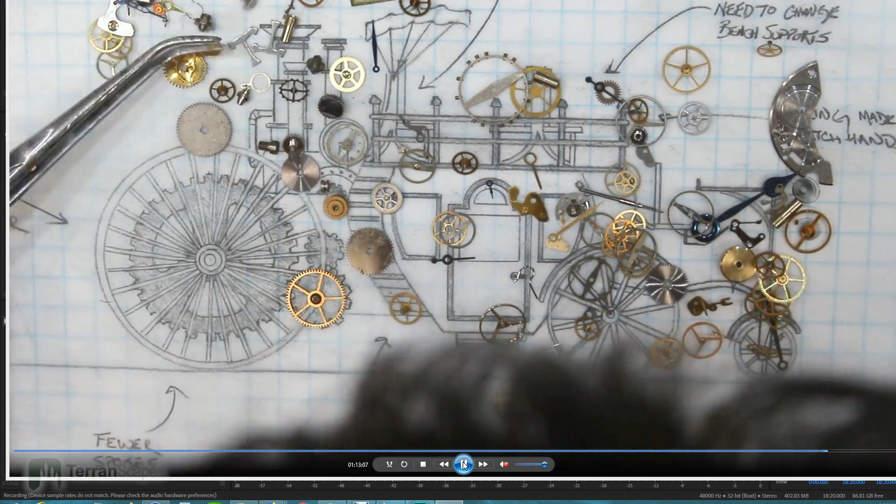So I'd like to be able to potentially assemble some of these gears to create stacks that have different gear ratios, for instance. I don't really have plans on exactly how or what I'm going to do with that. That'll be something I decide when I finally start getting to the construction and getting to the areas that need gears, but it is something I'm thinking about ahead of time.

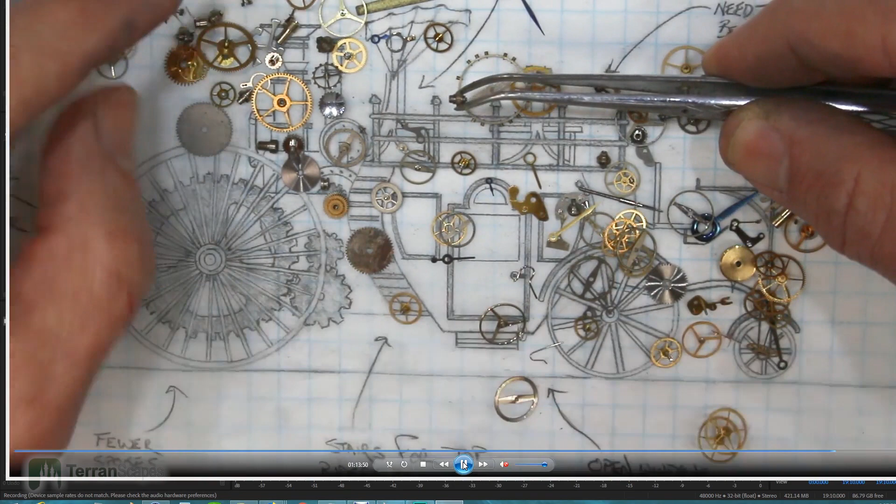So that was one of the things when I was out looking for gears, actually today before I started shooting this video, that I was trying to see if I could find sets that have some improved thickness, and that would allow me some kind of ability to stack them without having to try to meet these ultra-thin sections. Some of these are a little thicker, but if you notice, on these larger gears, because they have those thin radial arms, see how much lighter they feel than the one that I put in.

The one I put in is actually kind of like what you see with cheaper plastic gears - they'll have that large infill for strength because they're plastic. But when I find the right gears for this, I'll be able to see how that works. Oh my God, that's so frustrating.

And at this point, I think I went to go get my ceramic tweezers, and now I can do at least one side non-magnetically. Eesh. So this is going to be something to play with when I get to that stage.

And as you can imagine, there's going to be quite a bit of fiddling and piecing together and test fitting and lining up. But I don't know, it's kind of fun to work with these little tiny bits. I have some magnifying goggles or headpiece that will help me see these parts when I'm working on them, because trying to fit them to some of these posts is like yeesh. And it gave me a little bit of an appreciation of watchmakers and what they do.

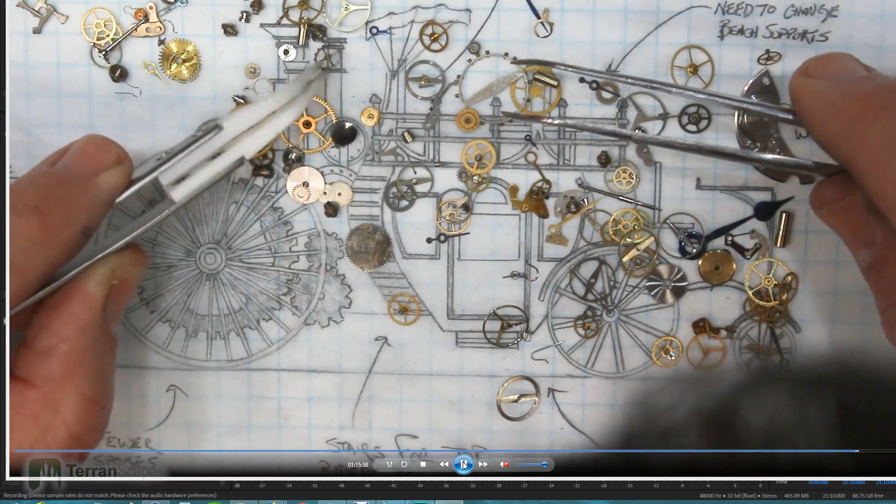See, now this one has a little pinion gear on it, and I'd like to get those off maybe. I don't know how I can. I don't want to cut them off, only because maybe they fit that rod really well or something. I don't know, I'm going to have to play with them, and I'm going to have a pile probably like 3 times this size to sort through when I'm done, so who knows?

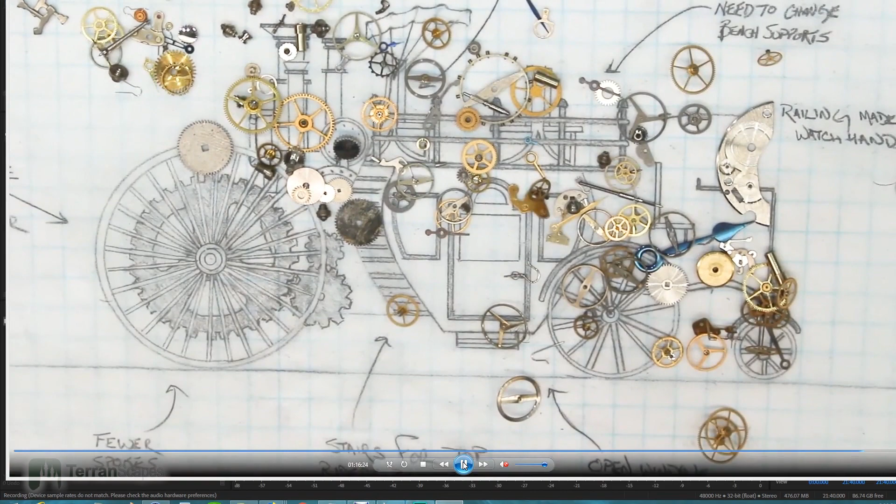Who knows? But I did want to sit down - I mean, I could have just shown you these and packed them all up in about 30 seconds and put them away. But I wanted to sit with them for a second and just play around with the ones I have. And that also gave me a sense of maybe what I could look for when I purchase some others.

But amazing how none of these seem to fit any of the post materials that I tried out. But you can see there's all sorts of weird bits and doodads, and so I'm sure some of them fit some of them, but yeesh. Now, see, that's nice. See how that little screw end fit right in there? That's what I'm talking about.

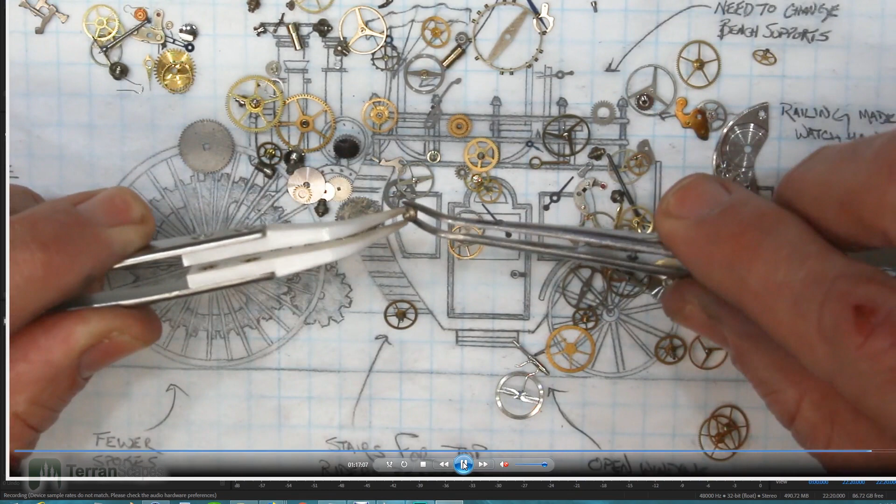And I don't know if you're going to be able to see any in this, but almost, let's see here. Right here, there is a little tiny watch hand, and there are a couple watch hands that I have that are even smaller than this, and they're going to be perfect for like a little dial gauge, you know, in the back - a pressure gauge or something like that.

So I don't know, I like things in miniature, obviously, and I think it's just going to be kind of fun when I get to that final stage of piecing together all these little bits and doodads and trying to see what kind of intricate cog working I can make.

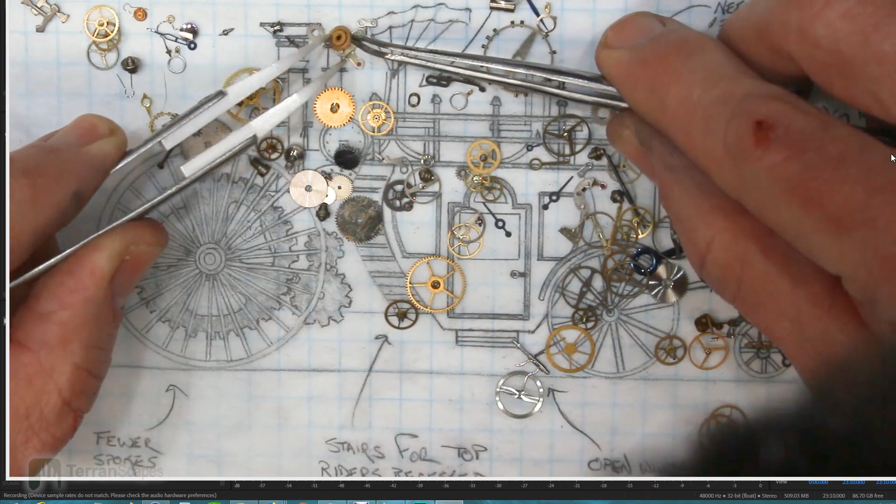See what I mean, though? It's like nothing fits anything. How the hell does that all work out? I don't know, what the hell kind of parts do they throw together?

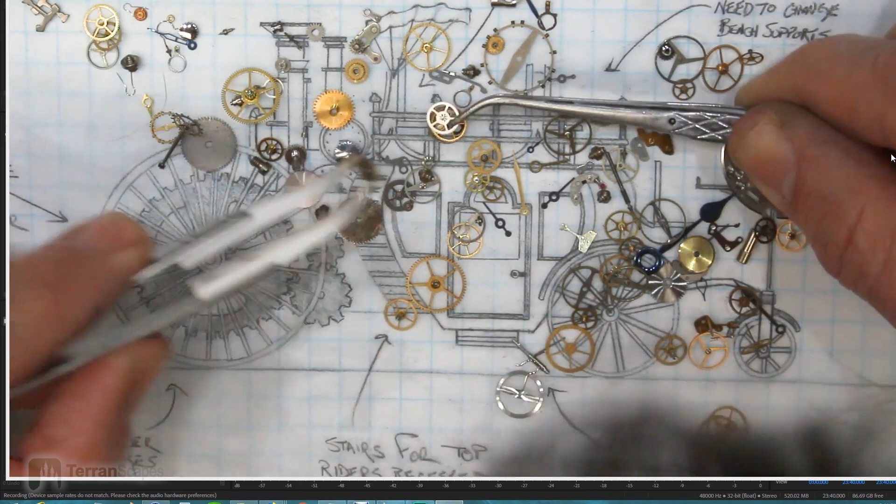I think they just have like this giant vat of parts, and then they just scoop it out. They sell it by the gram - you know, you get like 10 grams for $8 and 20 grams for 12 or whatever. And I think this was maybe like a 10-gram bag, something like that. So it'll be interesting to see what gets scooped in the next one.

Although I saw some on eBay that were a little more specific in the lot that you would get. So I'm just going to have to shop around for a couple hours and find a couple that I like. And I'd like to get some more watch hands as well. Like I said, I'll be trying to create the railing with the watch hands, which I think is just going to look fantastic and much easier than me trying to place little styrene rods or something, which isn't going to look ornamental. I want it to look a little ornamental.

But, oh, there's one. See? Look at that, look at that. I can't even get it off my tweezers - even the ceramic ones. I don't know, I think it's like a static electric thing.

Look at how small that one is. See? Isn't that nice? If you're just looking over now, it's right here. Isn't that nice?

And, oh, and for the cart, I was thinking I don't want to make it too ornamental because it's a commercial coach.

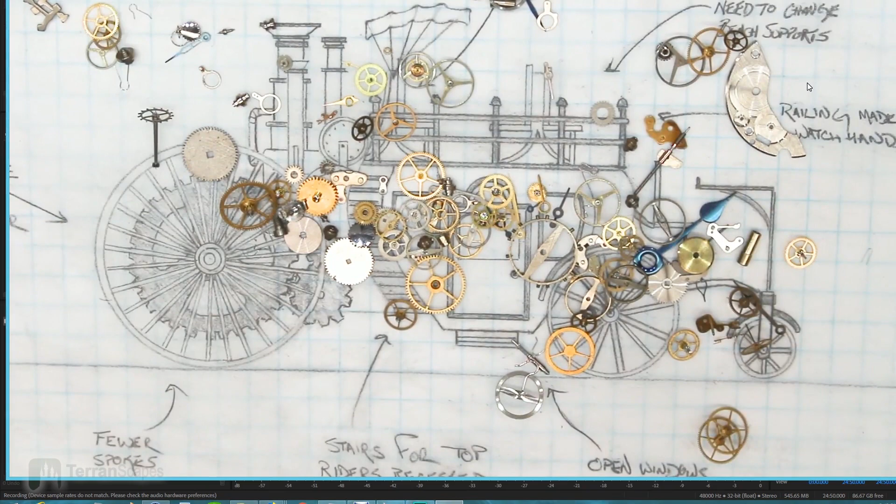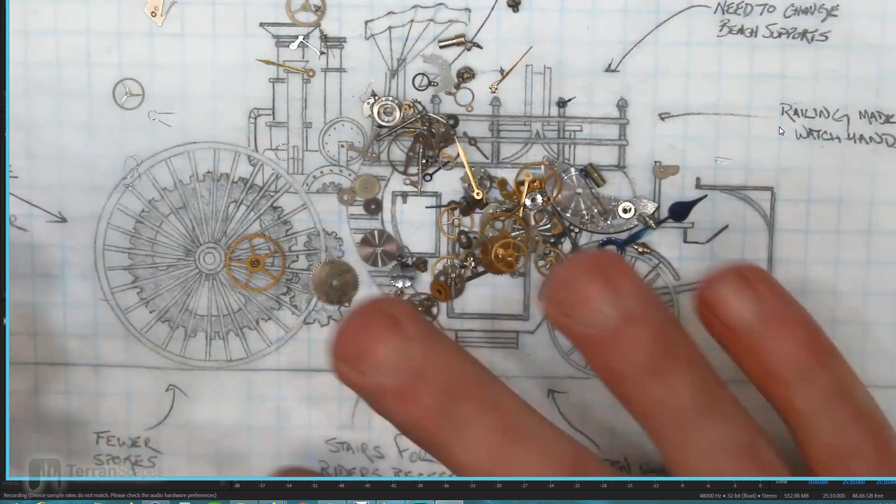This isn't a fancy livery, so I can't dress it up too much. But I did want it to have a little fanciness, which I think helps. Steampunkish constructs tend to have a little flair to them. Not always, but it's maybe the style that I like the most.

You can see me picking all these up on the draft because I've already clear coated it, so now I don't have to worry about smudging it, and I can just manhandle it as needed. My God, though, picking all these up, it's like I have to stick them to my fingers to get them off. Some of these parts are so small. It's crazy. Makes me wish I was a watchmaker.

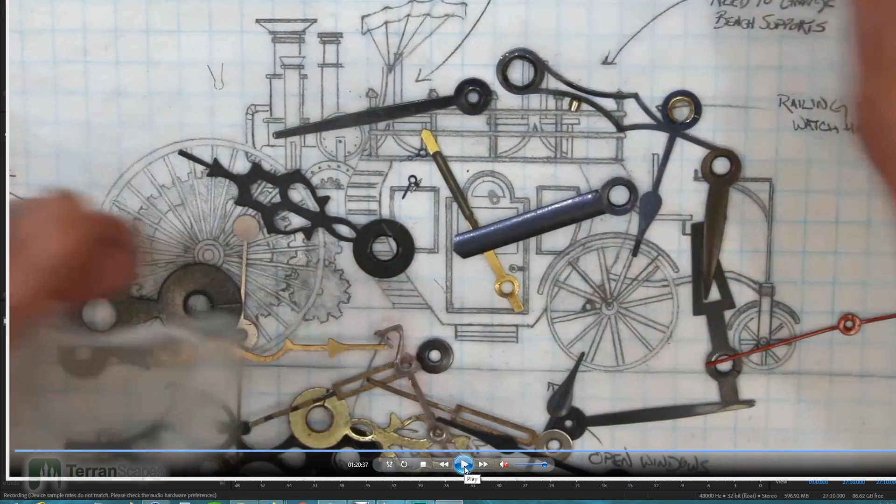Oh gosh, and looking - what if I took like this and cut these off, cut this here, and then I could use these almost like as the support for the front wheel, right? You get something like that. So I'm going to be looking for these kinds of bits to help solve some of the construction issues that I can't do, say, by making a template and cutting it on my scroll saw. So a lot of options of how to tackle the problems, and some fun in picking out some of the pieces to solve those.

So this wraps it up. Hope you've enjoyed the journey along this drafting process. And hopefully next video, I'll have a mock-up ready, and I'll have, well, at least the mock-up started, and I'll have the top view done as well. So I hope you enjoyed taking a look at that.

It's challenging to put that together, and how I'm going to build some of the elements are a mystery to me, but I didn't let that stop me in terms of what I wanted to design. I just said, don't worry about how you're going to build it, just think about what you want to build. But I have a lot of ideas, and I have explained several of them in the longer at the bench version. So if you're watching that version, sorry for repeating. But if you haven't seen that version, I talk quite a bit about different ways I'm going to tackle some of the more challenging pieces. So you can see that there if you're interested.

So I'm going to do the top version of it next, and that should actually go comparatively quickly because it's dictated by the profile shot. And then I can make a very rough mock-up. Trust me, I am not doing all the little doodads, but I just wanted the shape, and then I can put that out and see. And I have some modifications for the diorama in mind, but I don't want to tell you what those are right now. So think of that as a little teaser.